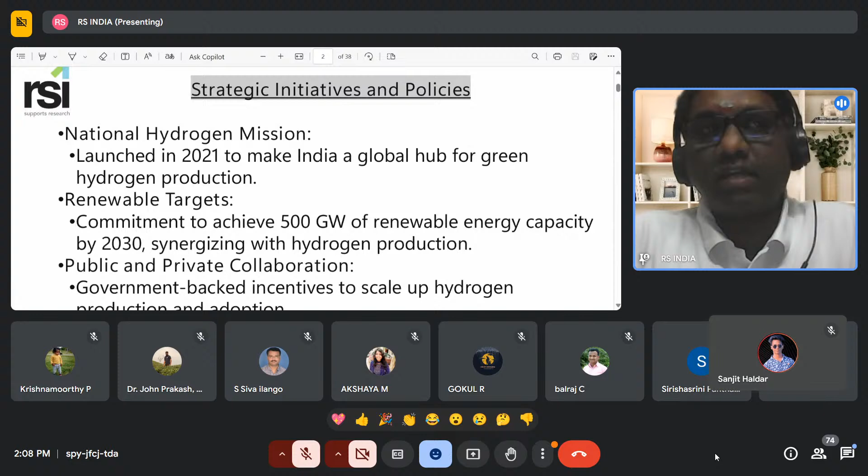But in the recent past, 4-5 years, there has been a lot of interest shown by many private companies, even the government, getting into this hydrogen energy part. Why? The reason is the National Hydrogen Mission, which was launched by the Government of India in 2021 to make India a global hub for green hydrogen production, because India has better chances than any other country for green hydrogen production.

That's the reason hydrogen energy has become a more hot topic in India. Now it is overtaking other technologies like lithium ion battery research, sodium ion battery research, and other battery storage research, which were regarded as the most highly interesting topics for researchers. Now people are getting more attracted towards hydrogen energy mainly because the government is paying more interest in this hydrogen energy.

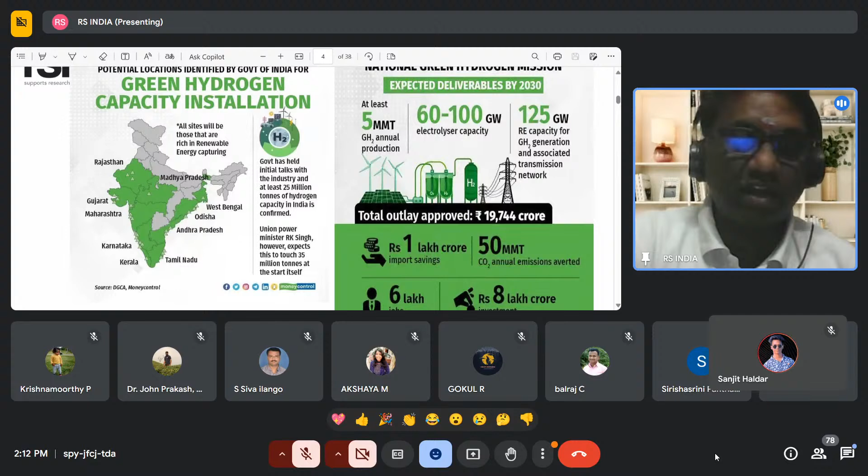They have more, and even Odisha also has been identified as a prominent place for exporting green hydrogen to other countries. So if you look at this, this is the roadmap for India - the government has given some roadmap for how to produce green hydrogen.

Try to focus on this research area, because it is going to play a major role in the Indian economy, and it is going to play a major role in Indian green hydrogen export.

So the reason why we are covering this is to explain why hydrogen research is more important. That's what we wanted to give - a glimpse of the reason why we need to pay more attention on green hydrogen research before getting more into the technical part of green hydrogen production and fuel cells.

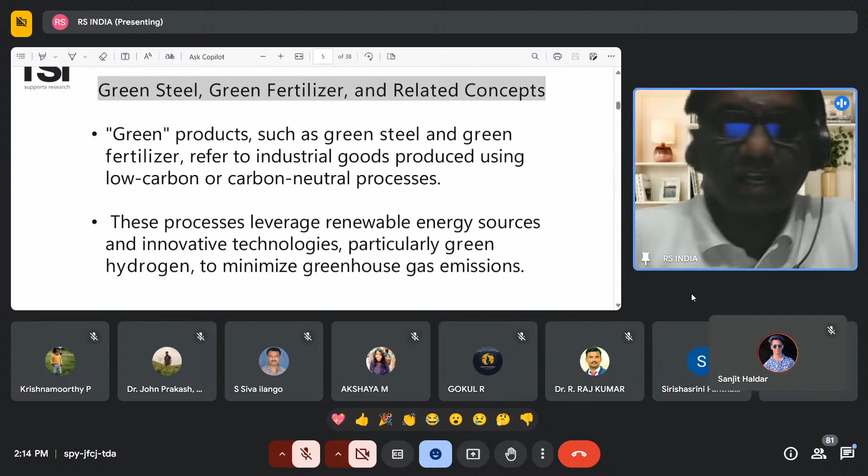As we discussed earlier, the government is paying more attention on green hydrogen production. While they are exporting, who will be the buyer, why should they buy, why should we import, why should we export the green hydrogen?

The main reason is there is now a concept of green steel and green fertilizer. Such green products - green steel and green fertilizers - refer to industrial goods produced using low carbon or carbon neutral processes.

For example, in steel industries, there are a lot of melting processes and various high temperature processes, where the requirement of high temperature is very important, and they are using natural gas or electricity derived from thermal power sources. So they are not green in nature, yet they are being used.

Since they wanted to cut this usage of carbon emission methods, they wanted to utilize hydrogen as an alternative for this. For that they need hydrogen derived from green renewable sources - that is called green hydrogen. So the export of green hydrogen is more important, because the whole world is paying more attention on using hydrogen as fuel in place of other fossil fuels and hydrocarbon based fuels. That's how this green concept is evolving.

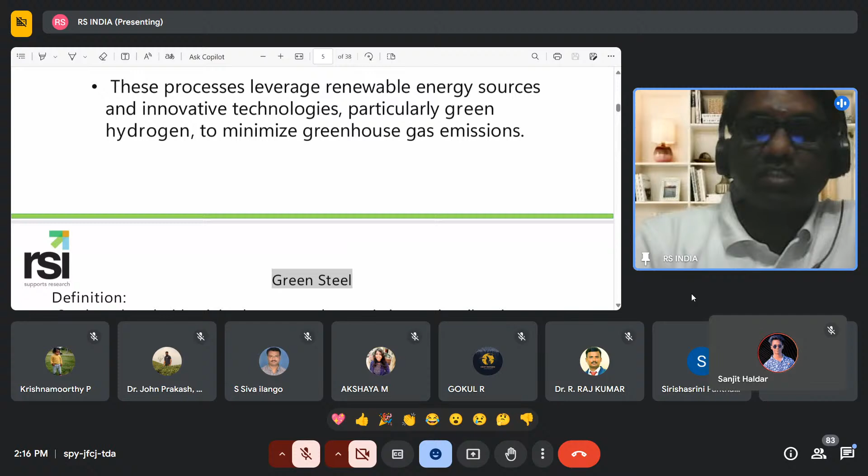This process leverages renewable energy sources and innovative technologies, particularly green hydrogen, to minimize greenhouse gas emissions. That is the main motto, and the European countries are paying more attention to this. So there is a great amount of opportunity for India to export green hydrogen in the near future.

Already there are many private companies like L&T, Sterling Power, Reliance, Adani, and even HPCL, IOCL, all very focused on this research, setting up their own R&D labs and production labs for green hydrogen export. The reason is we are already involved in supplying many instrumentation, software, and production technologies to these companies.

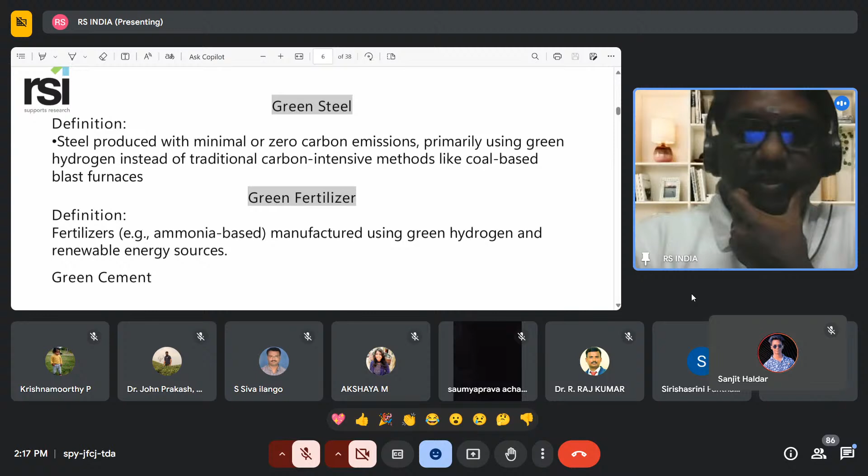So what is green steel? As we discussed, green steel means steel produced with minimal or zero carbon emissions, primarily using green hydrogen instead of traditional carbon-intensive methods like coal-based blast furnaces. Blast furnaces use coal-based fuel, sometimes natural gas, or electricity derived from thermal power plants. So they wanted to cut down the use of such power to avoid greenhouse emissions.

Green fertilizer is almost the same as green steel, manufactured using green hydrogen and renewable energy sources. Similarly, green cement, green chemicals - many applications are evolving. So there is a lot of opportunity available for green hydrogen utilization. India is paying more attention to this, and a lot of opportunities are being created for hydrogen production research.

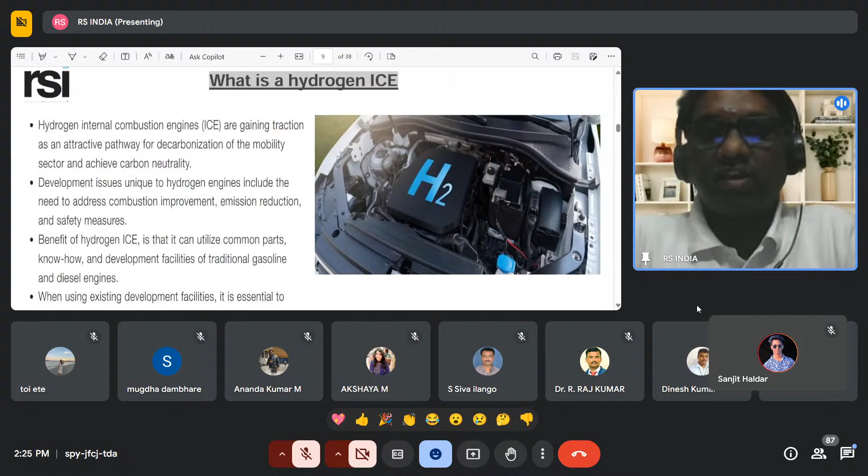So what is a hydrogen IC engine? Hydrogen internal combustion engines are gaining traction as an attractive pathway for decarbonization of the mobility sector and to achieve carbon neutrality. When we burn diesel or petrol, we get carbon monoxide and many other greenhouse gases; it's not good for our environment. Hydrogen internal combustion engines are really good, and comparatively produce very little greenhouse gas when you use hydrogen as a fuel.

The main benefit of the hydrogen IC engine is that it will utilize common parts. We already have the know-how of the IC engine, so the same way we can use hydrogen fuel in the normal IC engine itself. There are no complications, and they are planning that in the existing engine also we can use this hydrogen. That's the research going on.

We had an opportunity to discuss with Ashok Leyland people. We are located in Hosur, just next to Ashok Leyland. They are also very confident that in the next 3 years we can see hydrogen automobiles in the automobile sector. There are real chances, because currently hydrogen storage, the high pressure storage, is the main bottleneck, so they are working on how to get rid of it.

Once that is done, there is a real possibility to see these IC engines in India itself. Currently it is available abroad, where research grade vehicles are being utilized. In India it may take some time, but it is not too far. Soon we will be able to see IC engines using hydrogen fuel on Indian roads. The next slide shows the reality. And the Ashok Leyland person said it is going to come in the next 2-3 years.

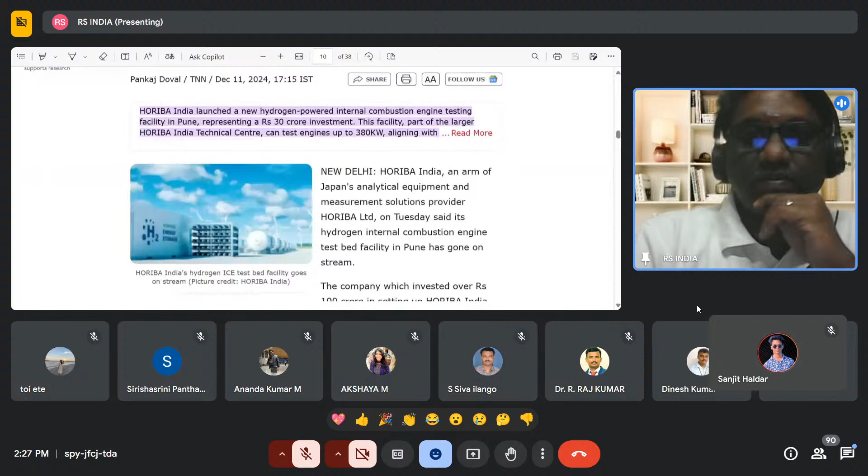This news I saw in the newspaper on December 11th, just 3 days back: HORIBA India's hydrogen IC engine test bed facility goes on stream. They have set up this new facility in Pune for testing IC engines using hydrogen fuel. This is a very interesting topic. So far we have seen diesel, petrol, gasoline, hydrocarbon-based fuels; we may see hydrogen fuel as an alternative.

So soon we'll be able to see. That's what the news gives as information. When you are connecting the dots, actually the reality is not too far. So we'll be able to see this IC engine application also using hydrogen fuel. So that's how this hydrogen fuel is gaining

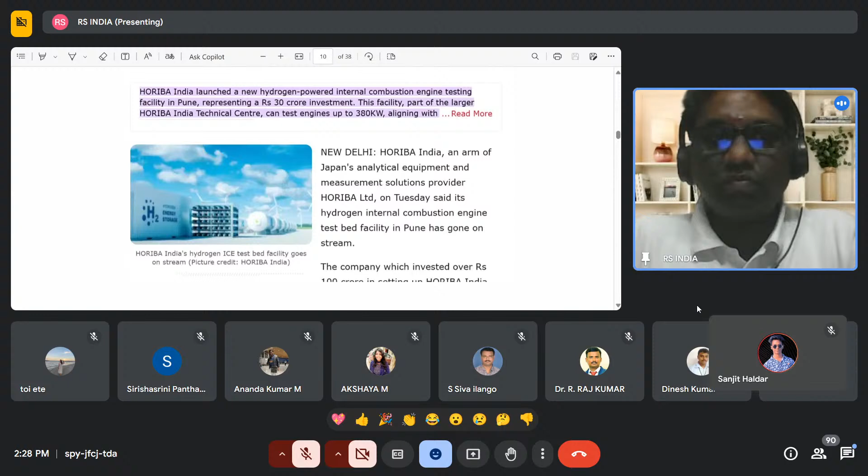So we have seen why we need to pay more attention to hydrogen production research. Now let us move into the more technical part: how we can generate hydrogen, what are the different methods, what components are required, what are the components of that instrumentation, and how it can be tested. We will see all those things in the next slides.

So as we have seen, hydrogen is a key component of most renewable energy sources. Now, there are many different methods available to produce hydrogen, but since I have limited space, I have mainly categorized them here: biomass, fermentation, methane type hydrogen production. And then photoelectrolysis is another method.

These two methods are more on the R&D side, not for high amounts of production. They are not very popular and not suitable for very high hydrogen production. But the other method, the electrolysis method, is the key area being used for green hydrogen production.

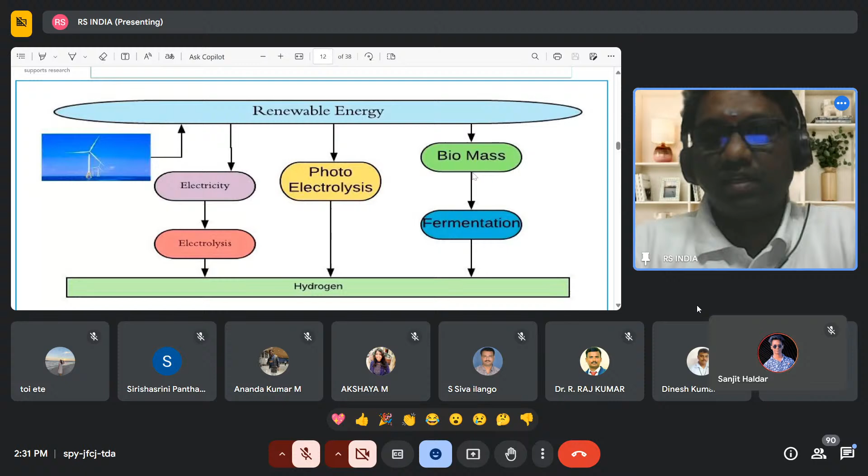In addition to the automobile application, this is one of the very interesting applications. The Indian Army is already using this fuel cell technology in remote locations on our border, in Kashmir, and other remote locations. So hydrogen has many applications, and the fuel cell is one of the main applications.

To produce green hydrogen, as mentioned, there is the photolysis process. This is still mostly in R&D, not developed as a commercial product. People are still doing research. The photolytic process involves the use of light to break water into hydrogen and oxygen, and you can divide it into two modes: photobiological water splitting and photoelectrochemical water splitting.

Photobiological water splitting involves the use of sunlight and specialized microorganisms such as green algae to split water to produce hydrogen. It's an interesting topic and many people are working on it, but honestly speaking, so far no commercial product is available. But you can't ignore it, because it is a very interesting topic.

It's getting more attention from many researchers. Maybe in future, if a commercially viable ROI, return on investment, is achieved using this method, then we can say. But as of now, no commercial products are available. On the R&D scale, many people are doing research on photobiological water splitting.

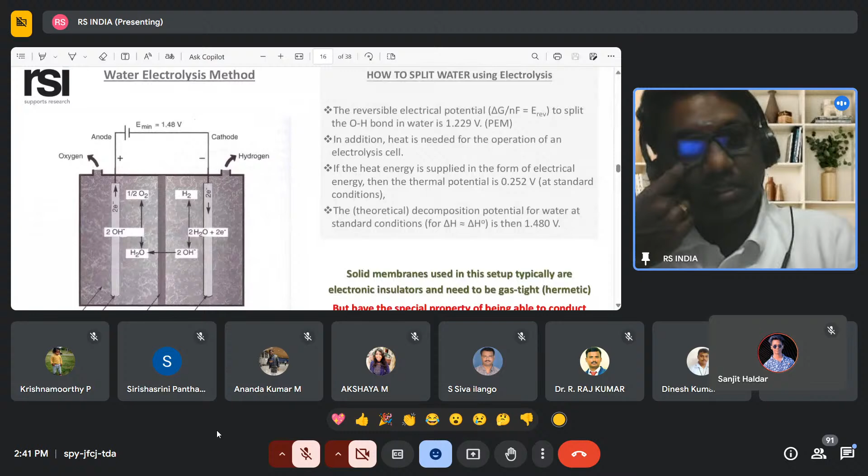If you look at the technologies, there are alkaline based technologies, PEM based technologies, SOEC technologies, AEM technologies, photocatalytic. There are various technologies. PEM is similar to what we use in a PEM fuel cell; this is a proton exchange membrane based electrolyzer. Normally we use commercially available Nafion membranes for this.

So this is the water electrolysis schematic diagram, where we have anode and cathode, two separate tanks. It is polarized with a specific voltage between the anode and cathode, and that's how the water is separated. We collect the hydrogen on the cathode side and oxygen on the anode side. This is a basic simple schematic of how we can produce hydrogen using electrolysis. If the electricity comes from a renewable resource, it is called green hydrogen. Otherwise, it is not green hydrogen.

Here we are applying DC power to split the water to generate hydrogen. In addition to the power, heat is needed for the operation of an electrolysis cell. Normally maybe 40, 50, 60 degrees; depending on the heat, the voltage varies, and the efficiency of hydrogen production also varies. This is one of the basic electrolysis methods. All the electrolyzers, AEM, alkaline, or PEM, work on almost the same principle, but they use different materials, which we will discuss in detail in the coming slides.

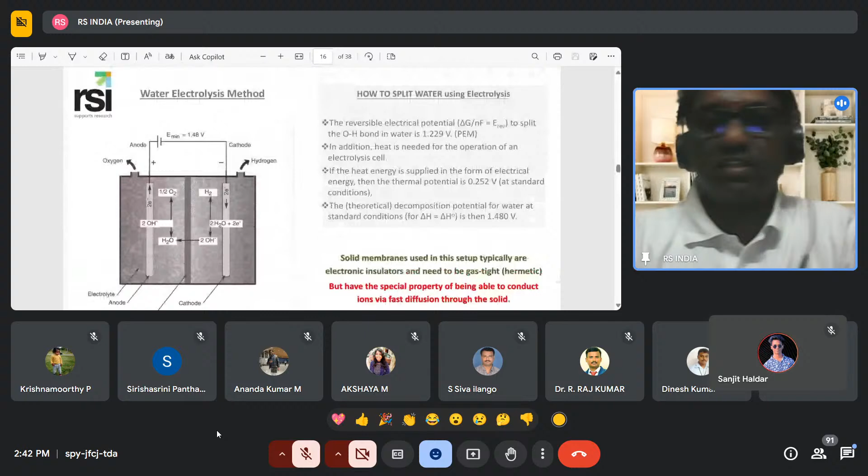One more bottleneck is that we have to use distilled water in this case. In the PEM method, distilled water has to be used as the feed for hydrogen separation. If you have normal water, that will not work, and you need to convert it into distilled water where the conductivity is in the order of microsiemens. Only then does it work well.

Whereas the alkaline or AEM methods use alkaline electrolytes like potassium hydroxide or sodium hydroxide, at many different concentrations. For alkaline, they can use 5 molar potassium hydroxide. For AEM, they can use 1 molar potassium hydroxide. Nickel is used as the catalyst, and the membrane is also not so expensive compared to PEM technology. That's how the alkaline and AEM technologies cost less compared to PEM.

Compared to PEM, SOEC is also a little higher in cost compared to alkaline and AEM, and they are very specialized applications only. We cannot use them in normal conditions; they require very high operating temperatures. Mainly oil and gas companies are paying more attention to this. So we have seen that electrolysis is the best method for generating hydrogen, and out of the electrolyzer methods, alkaline, AEM, PEM, and SOEC are more important.

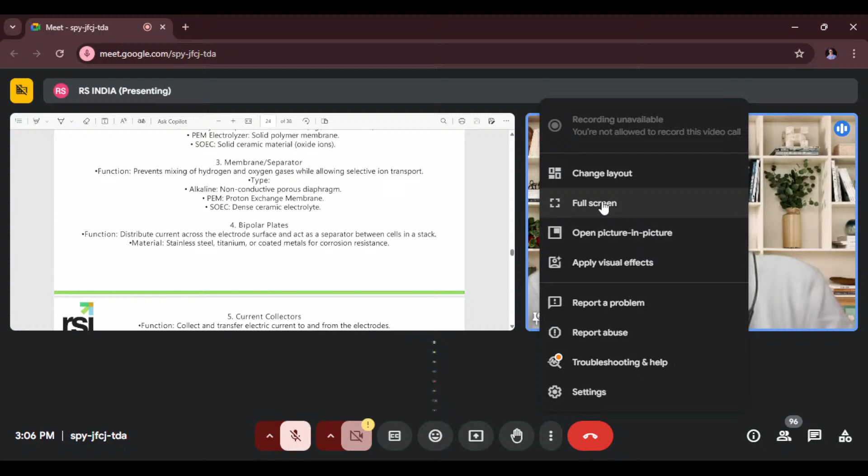Then the membrane and separators, what kind of membrane we use. Alkaline, we use non-conductive porous diaphragm. PEM, we use proton exchange membrane. SOEC, we use some ceramic electrolyte, dense ceramic electrolyte. So that's how actually it operates.

The technology is same, the method is same, the model is same, but depending on the type we use, we change the materials for this. And then the bipolar plates - we use different types of bipolar plates, like stainless steel, titanium, or coated metals for corrosion resistance.

Hello? John, please block that, some noises coming, John. John, please block that. Okay.

So we have seen these bipolar plates, various types of bipolar plates - stainless steel, titanium, or coated material for corrosion resistance we are using. And the

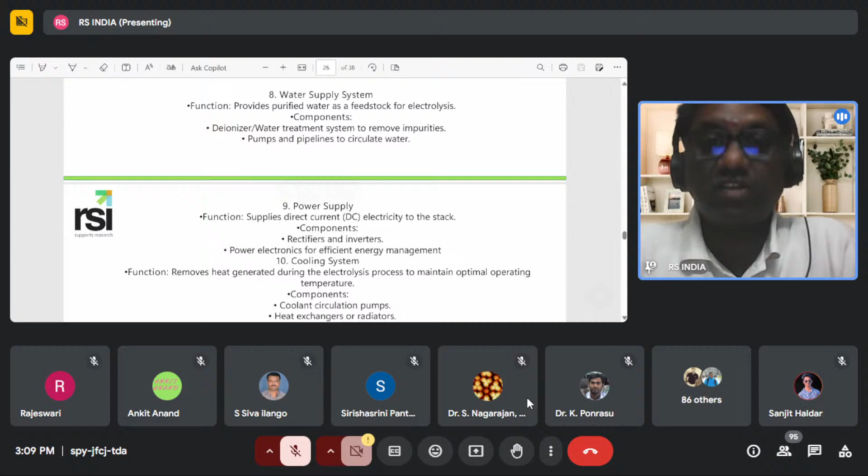Water supply system - it is how you provide the supply of water. Suppose if you supply distilled water to your cell continuously, that may not be an issue. But if you are supplying alkaline solutions like 5 molar alkaline solutions, that itself is really challenging because your materials will go bad and then you have corrosion. You have a disconnection - after maybe 6 months of usage, your pipe will get damaged. So all those things have to be taken care of.

So this has got a very attractive research area for mechanical engineering, instrumentation people. There is a lot of research scope available for the water supply system. This is one of the important portions in the electrolyzer - how do we supply the water? And then the power supply.

Of course, we need electricity to split the water. So for that purpose, DC power supply is required. In normal smaller cases, at lab scale, we can use the programmable power supply. Whereas in industrial grade, like the L&T and all, they are doing maybe around 100 kilowatt, 1 megawatt water splitting. So for that, they cannot use this normal DC power supply.

They have to generate the DC. Usually there are a lot of electrical engineers - importance comes into picture. How to convert the AC into DC and then regulate it into DC, supplying the DC all the time, like controlled DC application. All those things come into picture: rectifiers, inverters, power electronics. So there is a lot of scope for electrical engineering also in this power supply system.

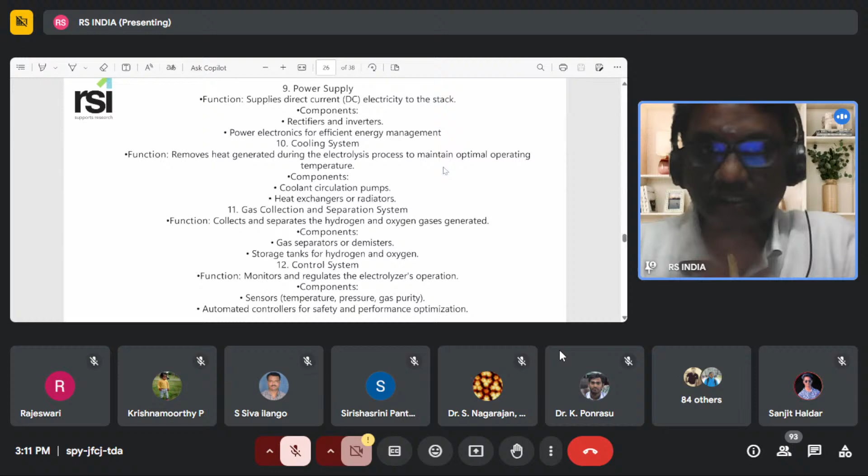Similarly, there is a cooling system because it is generating a lot of heat, and then the heated electrolyte is pumped into the cell for reaction. Once the reaction completes and that comes out, we need to take out the heat, and then we need to pump it back. There will be some recirculation process taking place. For that, we require coolant circulation pumps, heat exchangers or radiators - many different components are required. So here is the scope for a kind of automobile engineer or a chemical engineer. All those engineers will come into picture.

Similarly, once the hydrogen is generated, we need to remove the gas collection and separation system. As we have seen in the electrolysis method, we are pumping the electrolyte and splitting the water into hydrogen and oxygen. Once the hydrogen is generated, it carries a lot of moisture and water droplets, which has to be removed using various gas separators or demisters or other methods.

So this is another research area where we can pay more attention: the control electronics. All these things require control electronics, software, and power electronics. All these things are required.

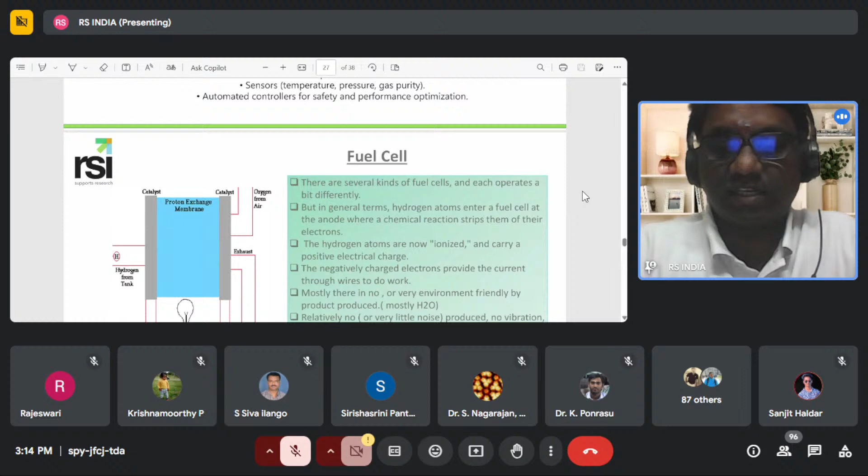Next we'll get into fuel cells. Fuel cell, as we know, is used to convert hydrogen into electricity. Similar to the electrolyzer, the fuel cell has got various types: PEM fuel cell, SOFC fuel cell, DMFC fuel cell. SOFC means solid oxide fuel cell, PEM means proton exchange membrane fuel cell. There are various different methods available.

So the more widely accepted and used method for fuel cells.

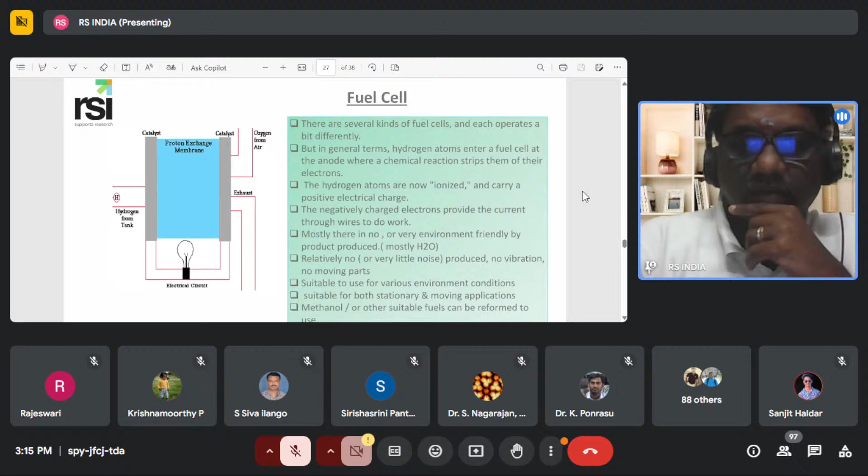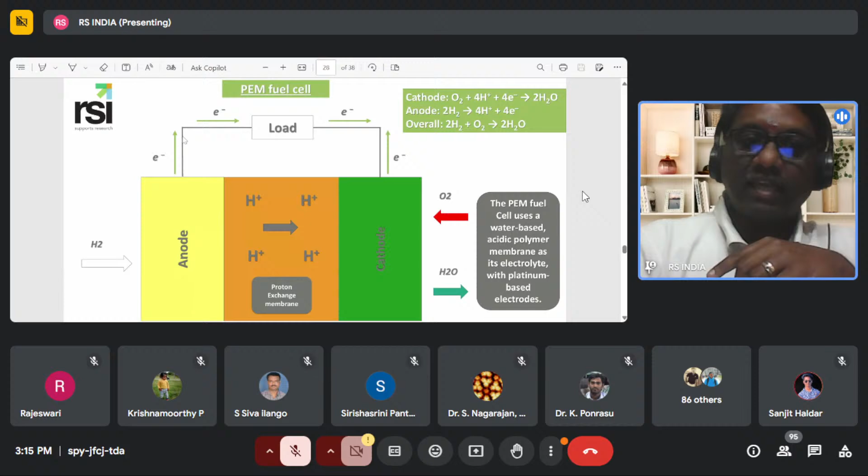I hope you must have seen these slides already in the previous presentations. When the hydrogen gas is supplied at the anode, the electron and proton are separated. The electron will take this route via the load, and only the proton travels via the proton exchange membrane to the cathode side. Again at the cathode side, the electron and proton get connected, and we get water as output. The electron is bypassed and not allowed to travel via this membrane, so it takes another route - this is where we are capturing the electron as electricity. So this is the basic fundamentals, which you must already know.

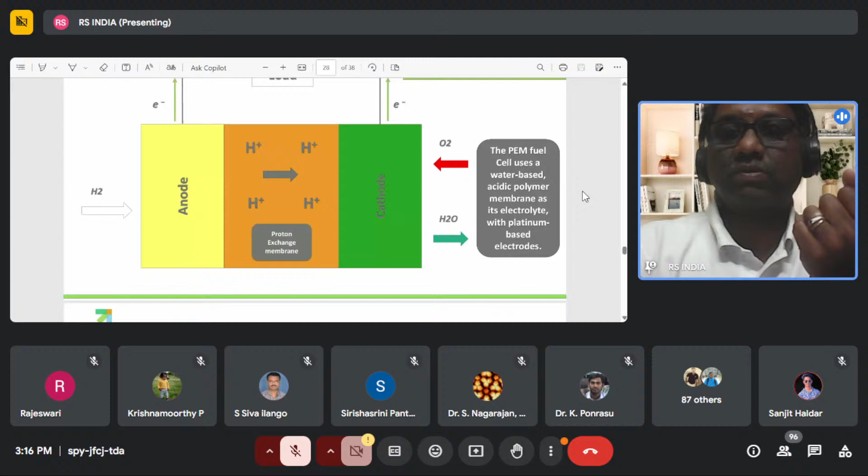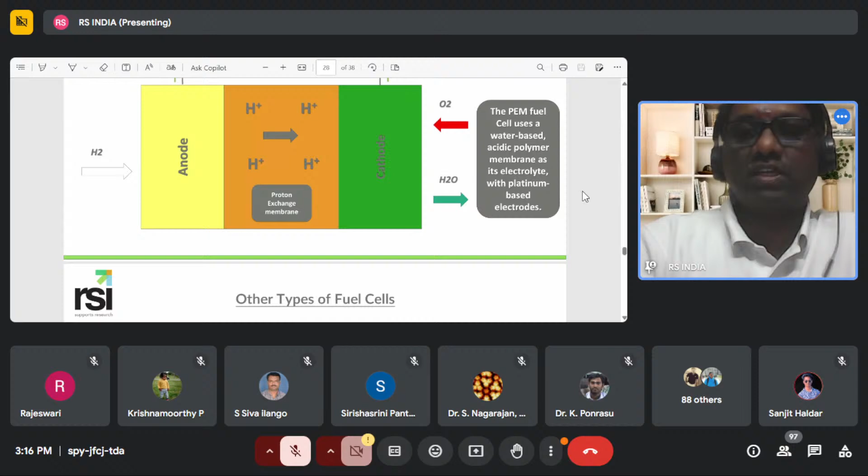This PEM fuel cell uses a water-based acidic polymer membrane as its electrolyte with platinum-based electrodes. Similarly, the PEM electrolyzer also uses platinum-based electrodes and catalyst. That is the reason this PEM method is a little expensive compared to other methods. But this is the one prominent and proven method as far as fuel cells are concerned. Of course, there are other methods like phosphoric acid fuel cell, DMFC - there are various methods, but this is the more proven and viable solution in fuel cell technology.

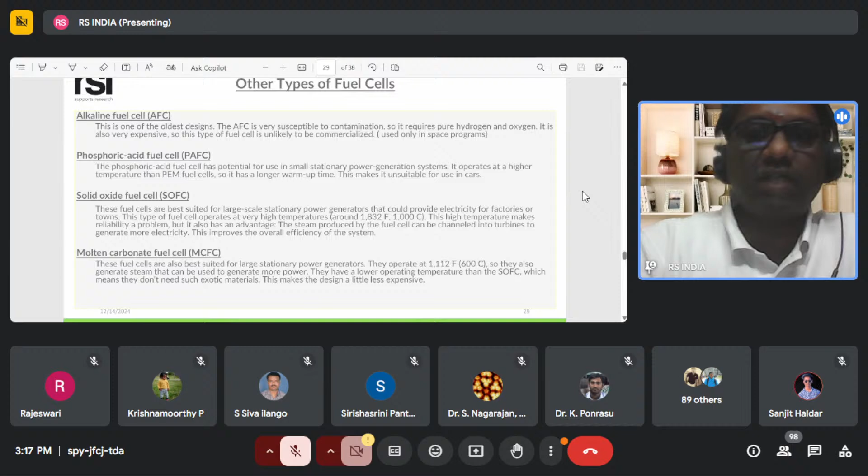Other fuels include alkaline fuel cell, phosphoric acid fuel cell, solid oxide fuel cell. Solid oxide fuel cell is one important technology used mainly, but as we have seen, it requires very high operating temperature, around 650 to 850 degrees, which limits its applications - only very few areas use it. Other technologies are not very popular, not commercially viable. They've tried to use them, but they were not as popular as PEM technology, which is why mainly people use PEM technology.

If you look at the applications of fuel cells, they are used for portable applications, stationary applications, and transport/automobile applications - various different applications. Portable applications can be used in remote areas like a UPS, or as I mentioned, in the army - Indian army and many other countries use this fuel cell to power remote locations where they cannot provide direct power using cables. This is the easiest way to generate power. So when you want to use portable ones like PEM fuel cell, DMFC (direct methanol fuel cell), SOFC - they are really good.

When you want to use stationary fuel cells, for example to power a room or building, where you need power in terms of kilowatts to megawatts, PEM technology is the more prominent one.

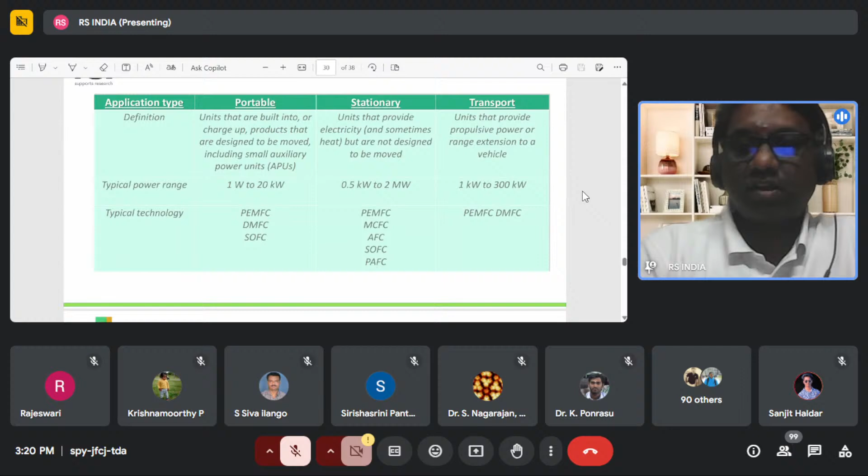PEM is more prominent and proven. Currently we can see that in future this PEM fuel cell will come into picture for automobile applications. But sooner, hydrogen IC engines are also on the cards. We don't know what will happen in future, but fuel cell is currently very promising technology because there is no combustion, and the only output is water, so absolutely zero emission. The fuel cell holds a very prominent place, especially for automobile applications compared to IC engines.

If you look at this technology, how do you rate its strength, weakness, opportunities, and threats?

If you look at the strength of the PEM fuel cell, it converts hydrogen directly into electricity, produced at site. It's very easy - you just supply the hydrogen and automatically get electricity. Very simple, no burning, nothing required. Just supply the gas and take the electricity outlet. It's an inexhaustible source, not like a fossil fuel or depleting resource - it's always available in abundance, like water, so it can be easily made and recycled.

Sustainable development, strength, and diversity in resources - these are all great strengths of these fuel cells.

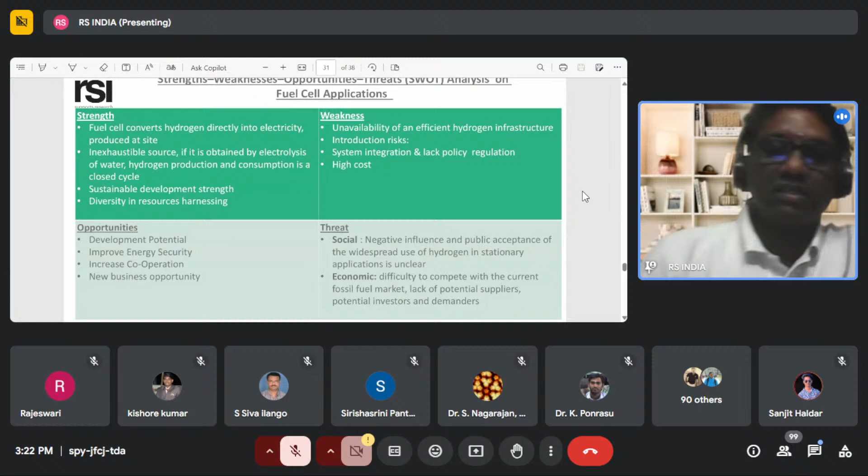If you see the opportunities, it has development potential and improves energy security because it's not depleting, and carbon emission is nothing. It's more futuristic, and over time, as hydrocarbon fuel becomes more expensive, this will become cheaper in comparison during the course of operation. Maybe after 20 or 30 years, this may play a major role compared to fossil fuels.

As for threats - negative influence is why, even though it's already available, it's still not popular among the public. Many people don't know how to use hydrogen, and there's lack of awareness and safety issues. Even during installations, many people are afraid of using hydrogen cylinders. It has its own limitations, safety concerns are there, but if all the norms are followed promptly, there is no issue. That negative influence has to be removed.

It's good that our central minister himself is using a Toyota hydrogen car. That's an added advantage - it will improve confidence among the public in using hydrogen vehicles and other applications.

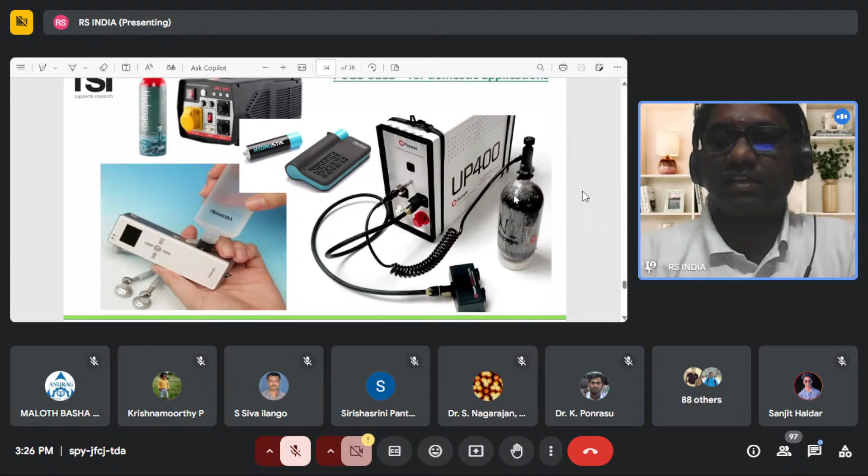Like a petrol generator, this will similarly use hydrogen as a fuel. Hand-carry generators are already used in many applications, especially remote applications where they do not have access to normal electricity, where wired power connections are not available. They are using it. So the applications of the fuel cell are not limited. They have many applications, not only automobile: domestic applications, stationary applications, portable applications. A variety of applications are available.

There is an interesting comparison I have seen between the hydrogen fuel cell and the lithium-ion battery: why it is not so popular, and how it is going to become in future. People will pay more attention to hydrogen fuel vehicles, because currently lithium-ion battery cars are called green cars. There is no combustion, there is no emission, so they are really environmentally good. But hydrogen cars are not popular mainly because of the car price. These car prices I have taken from a US website.

The approximate cost of a hydrogen fuel cell vehicle is €60,000, whereas in India I think it is around 60 or 70 lakhs, more than that. The electric vehicle costs 1/3 of the hydrogen vehicle cost. The running distance is almost the same. In the electric vehicle, the disadvantage is the charging time. But with hydrogen fuel cells, it is maybe 3 or 4 minutes; like how we fill petrol, we can fill hydrogen. So this is one great advantage: there is no time loss, whereas an electric vehicle needs a lot of time.

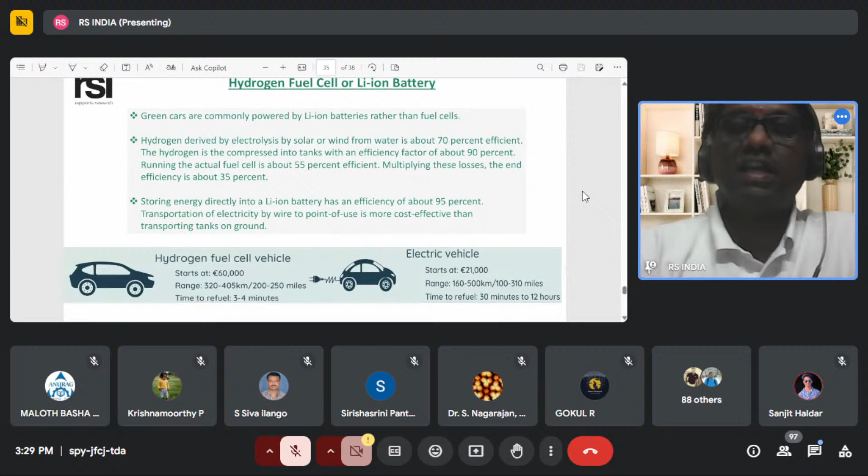And when mass production begins for hydrogen fuel cell vehicles, that will give a formidable advantage for reducing the fuel cell vehicle cost. So over the period we can expect hydrogen fuel cell vehicles to compete with electric vehicles, maybe in 5 to 10 years. Not in India, but at least in other countries, the US or European countries.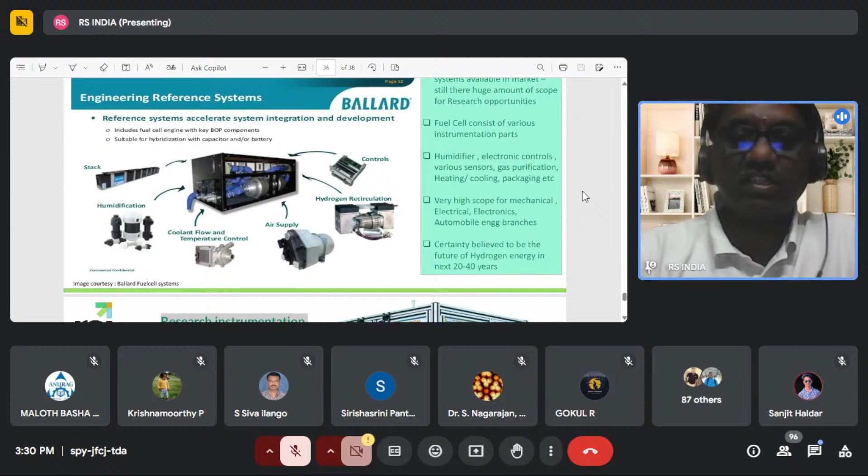And then, as we have already seen, the electrolyzer has a lot of research scope for various domains like electrical, mechanical, instrumentation, chemical. Similarly, the fuel cell also has a lot of instrumentation involved in it, like humidity, coolant, the electronics, power supply for electrical, hydrogen recirculation for the chemical engineers, and then control for instrumentation. So it has a lot of scope for various research domains.

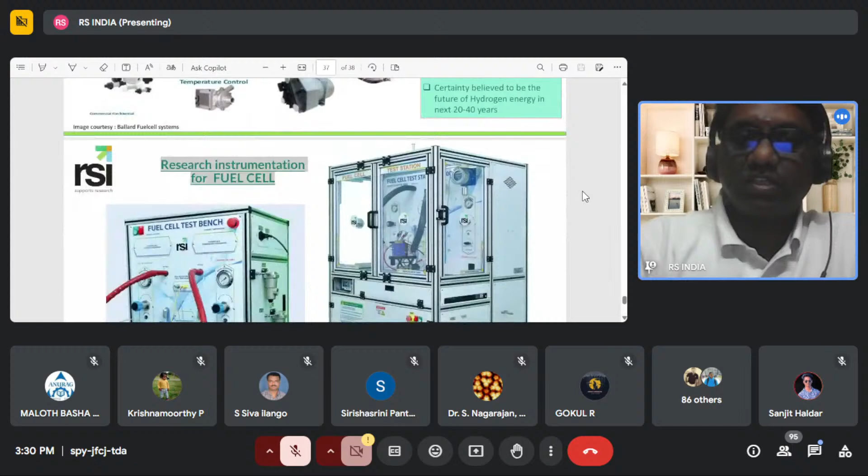So people can confidently get into this field. Because this field is only now getting more popular, they might get a good opportunity in future. To test these fuel cells or electrolyzers, we need some test stations.

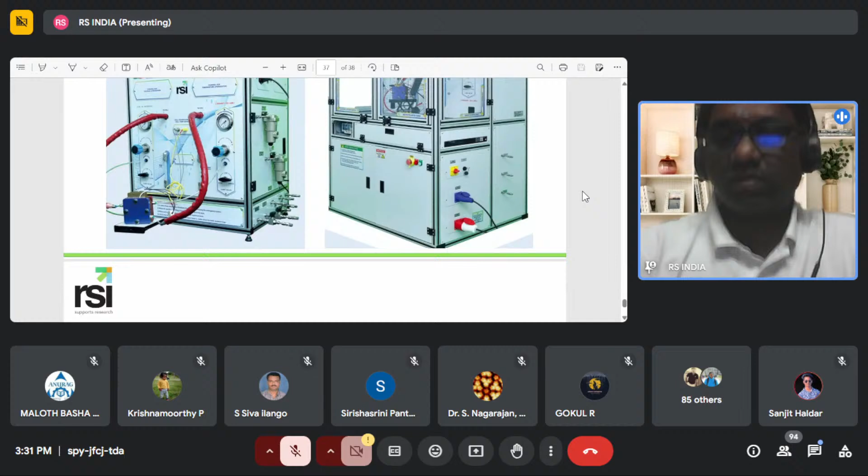So I think we are already running out of time. So let me go through this. Okay, yeah, we have reached the end of this presentation. I thought of giving at least 10-15 minutes for a more interactive session, but already we are late.

I would be happy to answer if you have any questions regarding these applications like electrolyzer, hydrogen generation, and hydrogen applications. If you have any questions, please try to post them. Yes, sir, please go ahead.

Sir, good presentation. What about the storage of hydrogen? So the storage of hydrogen currently, as I mentioned, there are normal cylinders, like oxygen cylinders, hydrogen cylinders, metal cylinders available in the commercial market. They cannot be used for high pressure applications. They can be used only up to a maximum of 16 bar or lesser pressure.

But when you want to use it for automobile applications, you need minimum 32 bar, 64 bar, and then it goes up to 320 bar. For real automobile applications they go from 160 to 320 bar pressure. For that, special cylinders are used: type 3 and type 4. Especially for automobile applications, they use type 4 cylinders. The material they are using

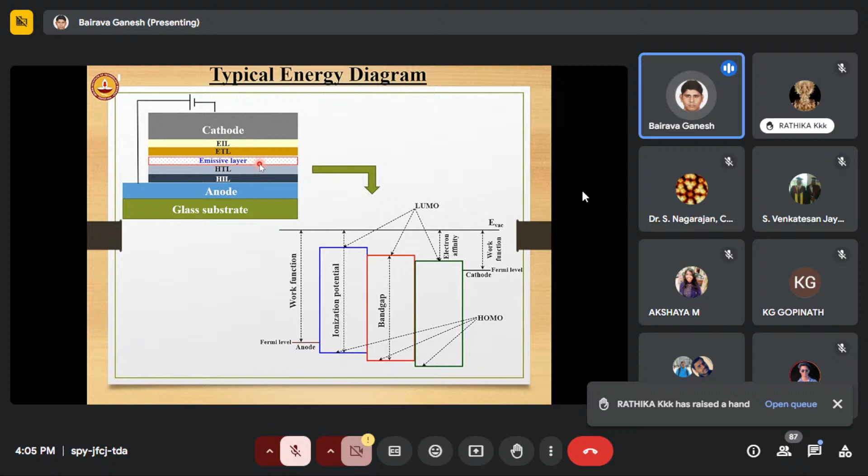So here I have mapped this organic device with their work functions. You can see the anode, and this is the cathode side. This is the E vac and this is the Fermi level. You can see typically the work functions and how the HOMOs are arranged against the LUMOs, and every time the holes and electrons will move towards your emissive layer and recombine at the emissive layer and produce excitons.

What are the materials typically present in the OLED structure? For the anode, as I mentioned, 95% of people are using ITO, indium tin oxide, because of the work function and ease of use. A few studies have been done using silver nanowires in place of ITO. For the hole injection layer, traditionally people use molybdenum oxide, or HAT-CN, a famous organic molecule, or PEDOT:PSS, where you can do solution processing. For the HTL, people typically use TPD, NPB kind of amine derivatives.

The active layer has been classified into three types: fluorescent based emitters, phosphorescent based emitters, and thermally activated delayed fluorescence based emitters. This is again a species of fluorescence, but the mechanism is a bit different, which I will cover in the coming slides. In the electron transport layer, people use BPhen, TPBi, TAZ; for the EIL, as I mentioned, lithium quinolate or lithium carbonate or lithium fluoride. People use aluminum on the cathode, or magnesium silver, silver or silver aluminum. So these are the typical materials used in the OLED layers.

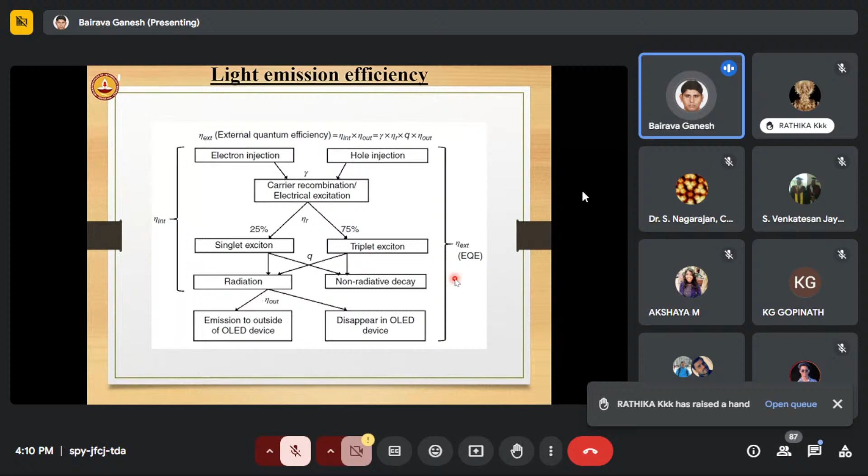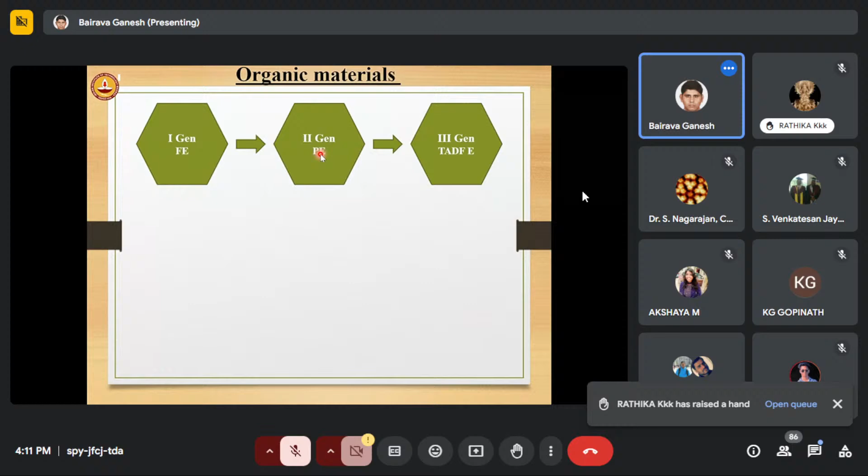Let's see the organic materials and devices. Like I mentioned, the first generation is called fluorescence-based emitters. Second generation is called phosphorescence-based emitters, and third generation is called thermally activated delayed fluorescence-based emitters. In terms of cost, fluorescence are small molecules having very low cost. Phosphorescence involves rare metals like platinum, iridium, and so on, so it is high cost. And TADF involves no heavy metal, so it is low cost.

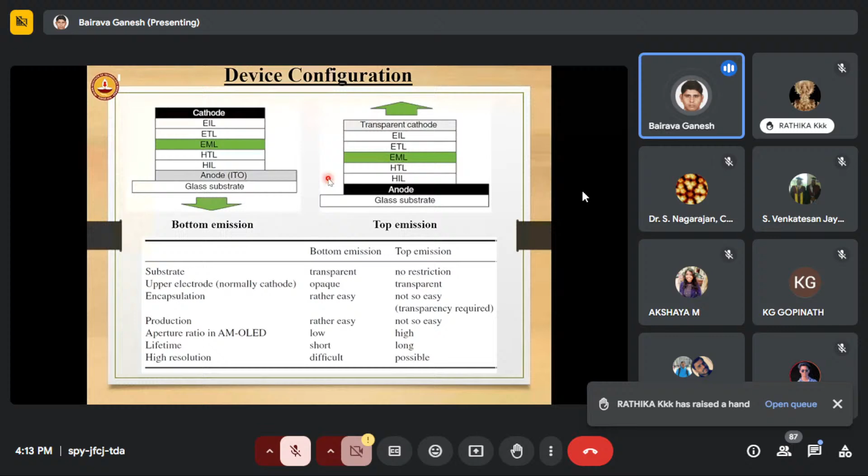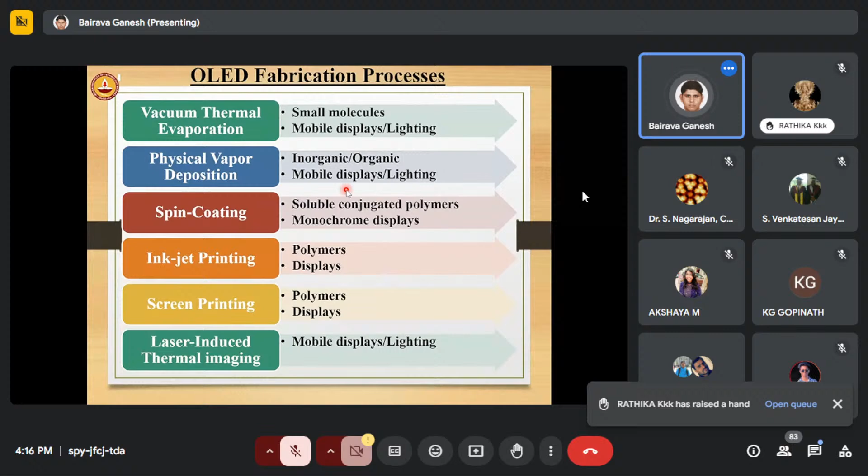How is the OLED fabrication process happening? People are using vacuum thermal evaporation, sputtering, spin coating, inkjet printing, screen printing, and laser induced thermal imaging kinds of processes. So basically, like I mentioned, we typically use vacuum thermal evaporation, where you use a crucible filled with organic molecules, and when we apply the current, the thermal evaporation happens, and the substrate is on the top. Using a shadow mask, wherever you want the pattern, that particular material will be deposited. And the thickness is monitored by a QCM, crystal monitor.

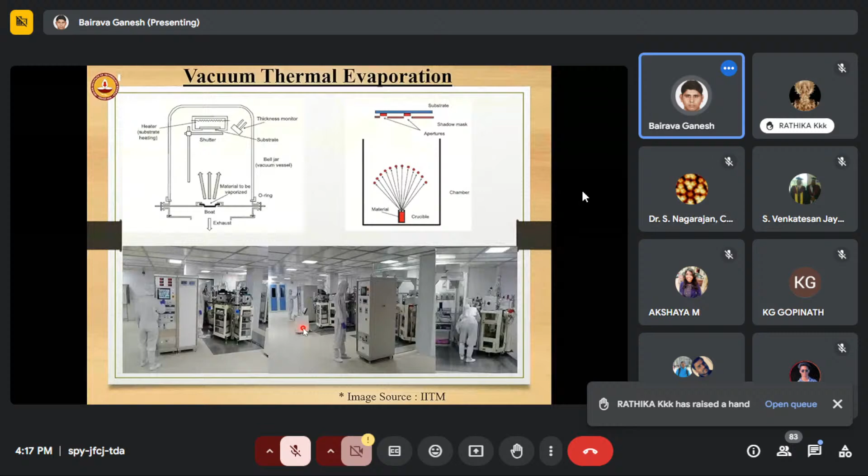So this is the facility which is used in our center. We use full vacuum thermal evaporation. Similarly, you can do a physical vapor deposition called sputtering. Advantages: you will have good dopant control. You have control over your temperature and carrier gas flow. And this is suitable for large area applications, which I have given here. And this is a heat-based method, so growth of dense film is a bit challenging.

Spin coating again is a very simple and cost-effective process, which is used for proof of concept in the lab, and suitable for soluble conjugated polymers. Just dispense the polymer solution, spin, ramp up and dry, and you will get a simple device. And of course, you need to make your contacts.

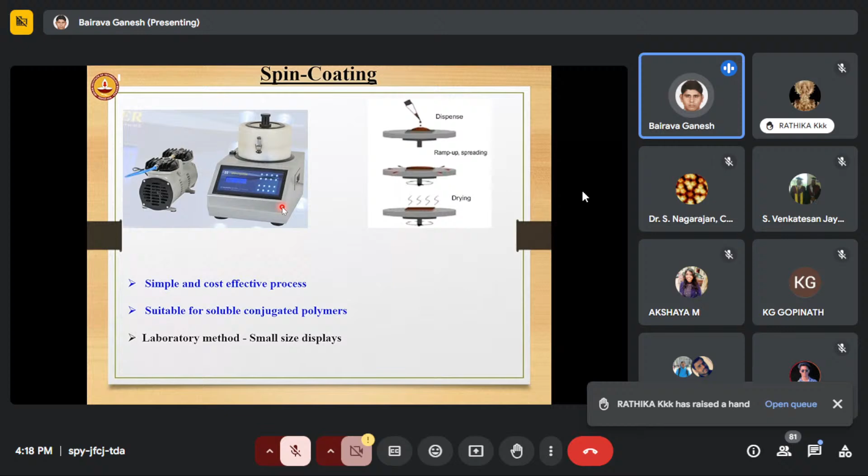Inkjet printing: again, you convert your organics into inks and just drop this ink, and there is no need for a masking process. It is suitable for large area display applications, but the display quality is not that equal. This is used for billboards and other applications. You have very good manufacturing flexibility, but the challenge is that ink rheology is very important, because the rheology will change during drying and evaporation.

So this is a typical process flow of red, green, blue side-by-side AMOLED. Typically the OLED evaporation is one cluster and OLED encapsulation is one cluster. You bake and clean your TFT thin film transistor substrate, do an O2 plasma, deposit the hole injection layer, hole transport layer, and individually you do the emissive red, emissive green, and emissive blue layers. Then you deposit the ETL layer, EIL layer, and cathode, and you put a capping layer to avoid any oxidation.

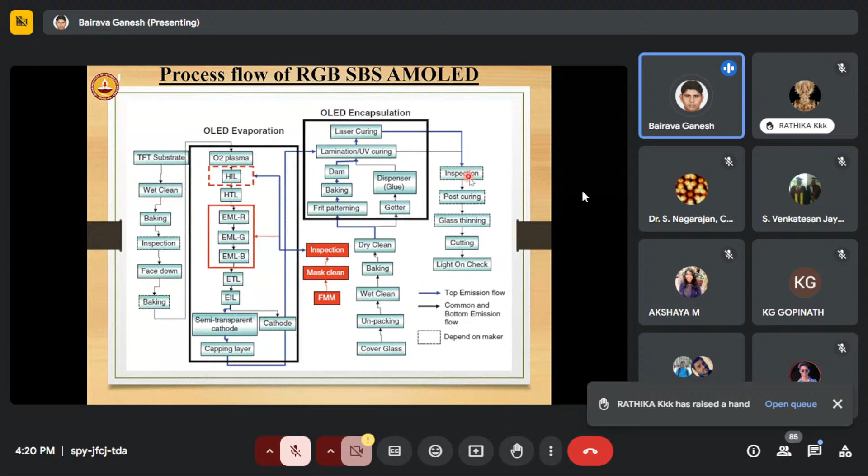Then this will be transferred to the OLED encapsulation, where you do laser-based curing, a laser-based process. After that, you attach a cover glass. Basically, the cover glass is to avoid any kind of oxidation or moisture ingress to the substrate. After that, it will go for inspection, curing, then you cut and check the light. Okay, this is the process flow of side-by-side.

So this is how industry follows a cluster type. The backplane will be introduced, and in one cluster you have HIL 1, 2, 3, and you use plasma in some places for cleaning. The cassette will come from here. You do blue first, followed by red and green. Then you do the cathode and it will go for encapsulation. So your structure will look like this.

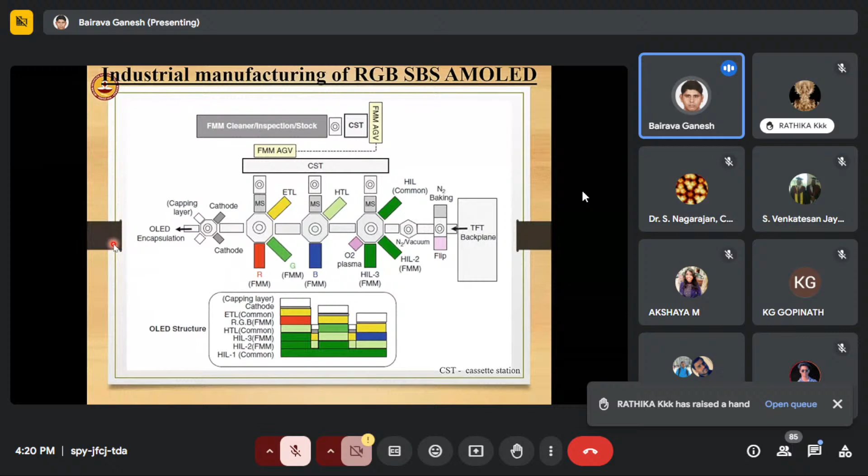How do you do encapsulation? Basically, encapsulation is where you attach a cover glass on top of your device glass. The purpose is to avoid moisture ingress and oxidation, because organic devices are very sensitive to oxidation and moisture. Any moisture ingress and oxidation will kill the device, and you will get dark spots.

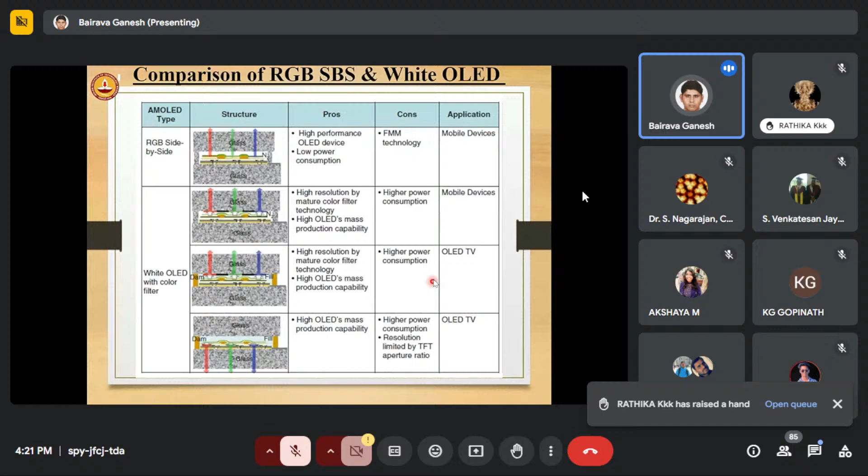This is a typical comparison of red, green, blue side by side. Similarly, you can use white light to produce the other colors. Here you can produce high performance OLED devices, and this technology is a fine metal mask based technology used in mobile devices. This is a top display, and white light is very good for OLED TVs, where light is produced on the bottom.

Let me take another two to three minutes to brief about challenges and opportunities.

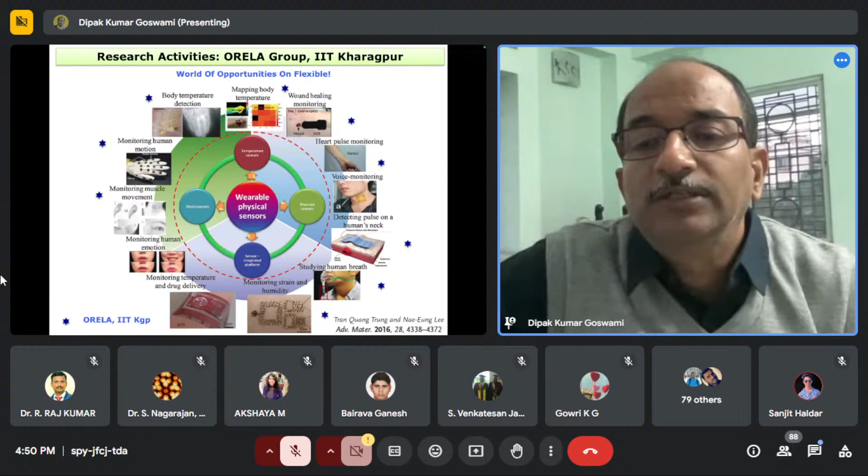So let me continue. What you see is there are lots of healthcare device sensors, categorized into 4 different categories: temperature sensor, pressure sensor, sensor in integrated platforms, and strain sensor. These are 4 verticals, and under these we have multiple sensors like body temperature mapping sensor, wound healing monitoring sensor, heart pulse monitoring system, voice monitoring system, and many more as listed here. All these sensors one has to develop and integrate into a prototype module to make a medical device and connect into the Internet of Medical Things. Then we can have a lot of flexibility in giving healthcare support to people of the country. All these, actually all the sensors, we developed in our lab, and I'll talk about some of them depending on time, and show that there are enormous possibilities, a world of opportunity on flexible electronic devices in healthcare, which one can pursue through this topic in their career.

The first sensor is the temperature sensor, which is ultra fast and ultra precision. Ultra fast means it takes millisecond time to measure temperature, and ultra precision means it can measure up to millikelvin temperature. The material we use is basically barium titanate nanocrystal along with some other polymer. We made a medical device for monitoring body temperature continuously, and also developed a smart mask useful for sleep apnea, and a smart spirometer for detecting and monitoring chronic obstructive pulmonary disease, COPD, asthma, and such conditions.

Second sensor is the humidity sensor. In this we used sensing materials like proteins, gelatin and albumin, and these humidity sensors can also be used for different medical applications.

Next is the strain sensor, which is basically a pressure sensor made with silver nanowires. It's an extremely sensitive sensor that can measure heart rate and blood pulse rate in your artery very comfortably with high precision.

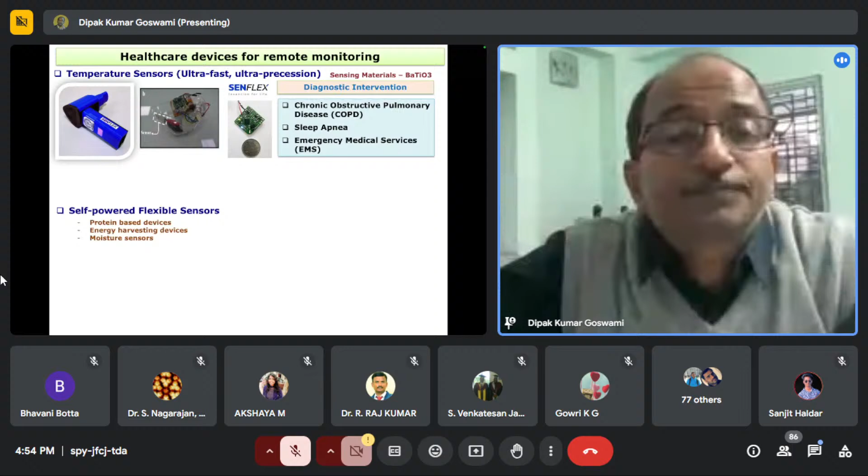This is a self-powered device, and you can see it's actually ultra flexible, developed on a 300 micron paper substrate. As I mentioned, it's a self-powered device that absorbs humidity from ambience and generates power. At the same time, it can also work as a sensor.

The main sensitive material is actually protein. We demonstrated that this is really an ultra flexible sensor, and it can very comfortably measure the moisture concentration in any area where you have a wound. Monitoring moisture concentration in the wound area is very important for doctors to continuously monitor the wound healing mechanism, because if it is completely dry or fully wet, both are actually not good for healing. So there is some percentage of relative humidity that should be maintained, and accordingly the treatment is decided. It's very important for monitoring wound healing moisture concentration in the wound area.

Next sensor, as I already mentioned, during the COVID time we developed a sensor which is an organic field effect transistor based sensor, and we demonstrated that it can detect COVID virus from saliva samples. It doesn't need to collect data from nasopharyngeal samples, because that is sometimes difficult. It can be used for self-test, and it takes only a minute to detect whether your saliva has virus or not. We have an app, and this is the profile of detection. In just a few seconds, it can tell you whether you are COVID positive or negative.

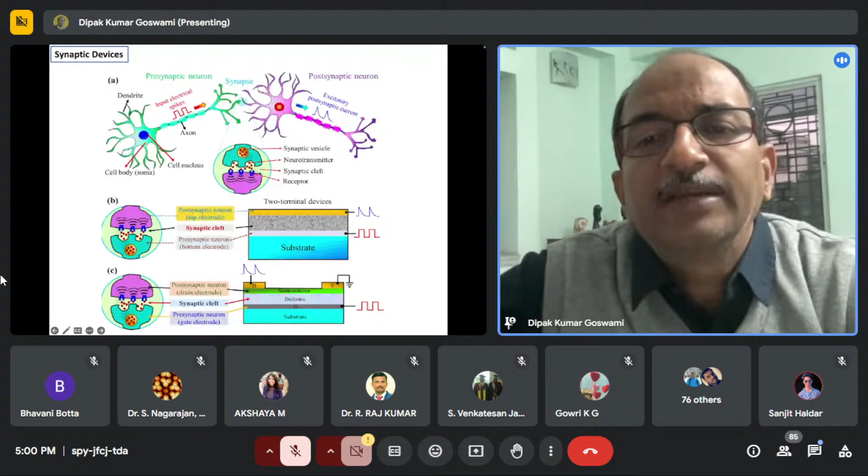So since an ion conducts this signal, you can think that one can have an electronic device where actually the charge transfers. So we in fact develop these devices with different kinds of materials. Mainly these are all biomaterials and biocompatible materials for different applications.

So let me start with the first part. It's basically from fundamentals to technology development. Let's just quickly go through that. You take a material, right? And if we think about the charge transfer through this material, then we essentially consider the electrons, right? And if you take, let's say, silver or gold or silicon, the atomic number tells you how many electrons you have in a single atom.

Now if I have a piece of material, let's say gold or silicon, which is a semiconductor, I have billions of atoms. Let's say I have 10,000 atoms in a small piece of silicon. I have 10,000 times 14 electrons in that material. Now, where are those electrons? Not only look at the atomic structure; the periodic arrangement of the atoms leads to the formation of a band structure.

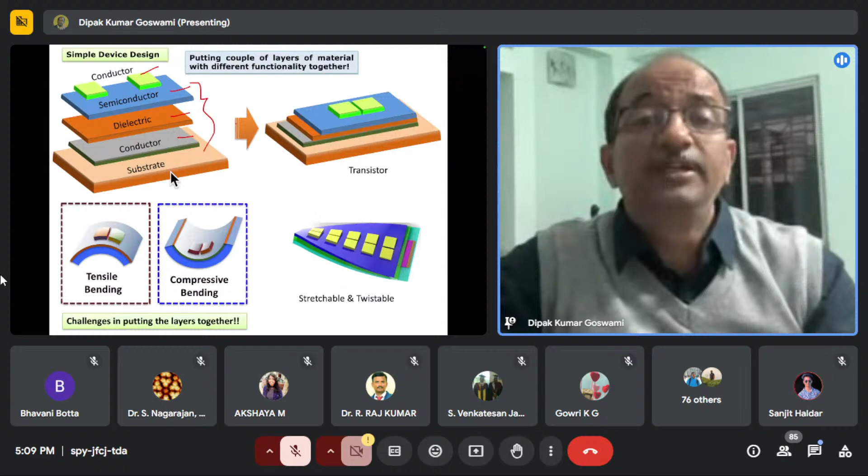And then whether these devices will be flexible or stretchable or not depends on the selection of the material that you have here. All right. So if the materials are not flexible, your device will not be flexible. If your materials are flexible in nature, then the device can be flexible, including the substrate, which also has to be flexible in nature.

All right. So how do you use this device as a sensor? An organic field-effect transistor is an electronic device which can be used as a sensor. How do you do that? There is a very fundamental understanding of making the selection of material for a specific application. For example, in this case, we consider the dipoles, and the dipoles are essentially separation of charge, negative and positive charge, which is P, and can be written as Q into D, right?

And when you apply some electric field to this kind of dipole, then basically there is a force which is applied here, right? And a negative force is applied there, so that force is basically Q into E. So your dipole basically gets a torque, and because of the torque, this dipole gets polarized. And when this dipole gets polarized, this is your electric field direction, it tries to get polarized along this. So you get a component along the PZ direction, and that's the polarization of the electric dipoles.

So if you can polarize them, then the thing that is changing is basically epsilon r. Epsilon r is the dielectric constant. So this is the classic Clausius-Mossotti relation for dielectric constant. If you can make a little bit of change in polarization, the Z component of the polarization vector, then you see that your dielectric constant will change, and this actually goes as the square of that. That means a little change can make a significant change in the dielectric constant.

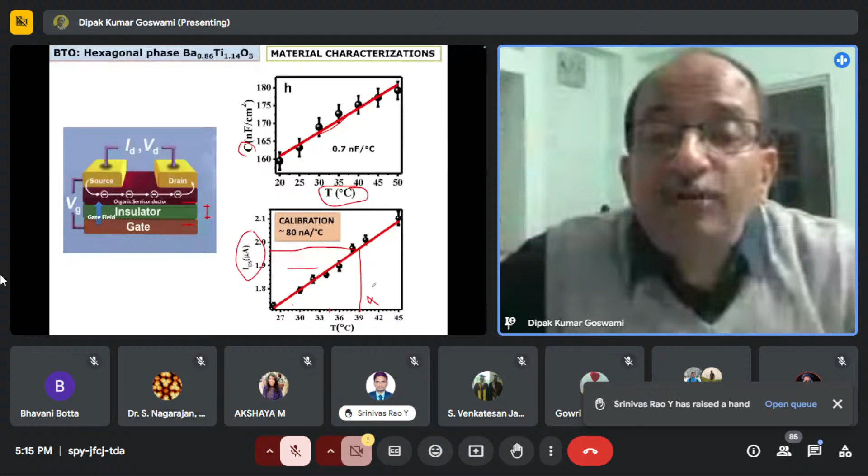And this value, like 80 nanoampere per degree centigrade, is a very high value of current, which can give you resolution in the millikelvin temperature range, and the response time is also pretty fast. So these are all material characterization. I will not spend too much time on it, but once you fabricate this device, look at the carrier mobility of this transistor. This is in days, so we checked over a year's time how the carrier mobility is changing.

And we do see that it does degrade, but at some point, when your carrier mobility is something like 0.2, it's almost flat. So it saturates there. So if you use this transistor as a temperature sensor, it can go for years without changing its property significantly. So that's the stability.

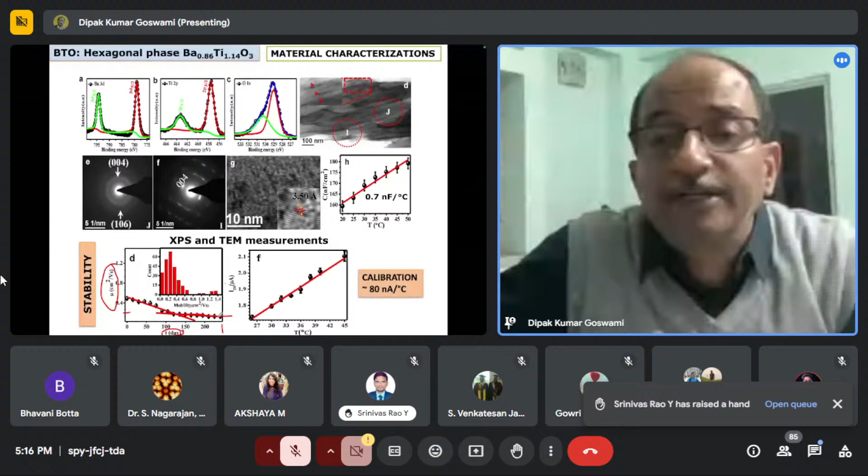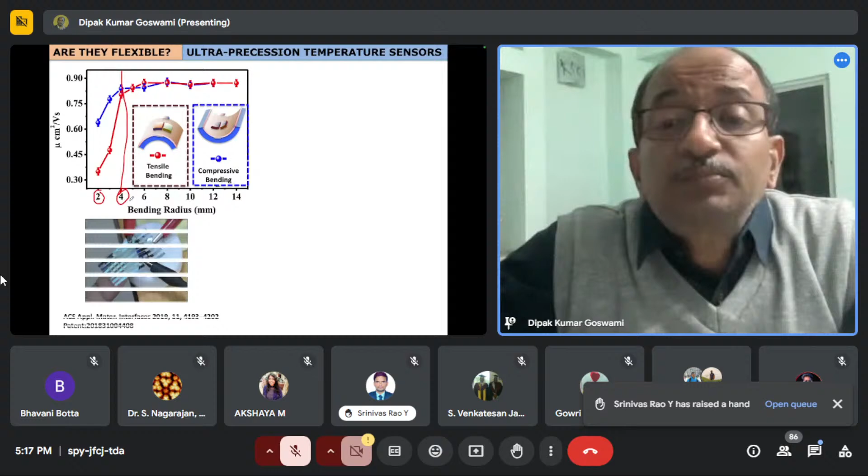All right. So just to confirm, can you hear me clearly, or is there still an issue? No issue, sir. It's perfect, sir. Fine. Okay. Thank you.

Some noise coming. Anu, can you please block that? Okay. Anu, can you please block that? Sir, your mic is mute. Please unmute, sir. Sir, please unmute your mic. No, sir. Please unmute. Is it fine now? Now fine, sir. Yes, sir. Sorry, sir. Sorry. Yeah.

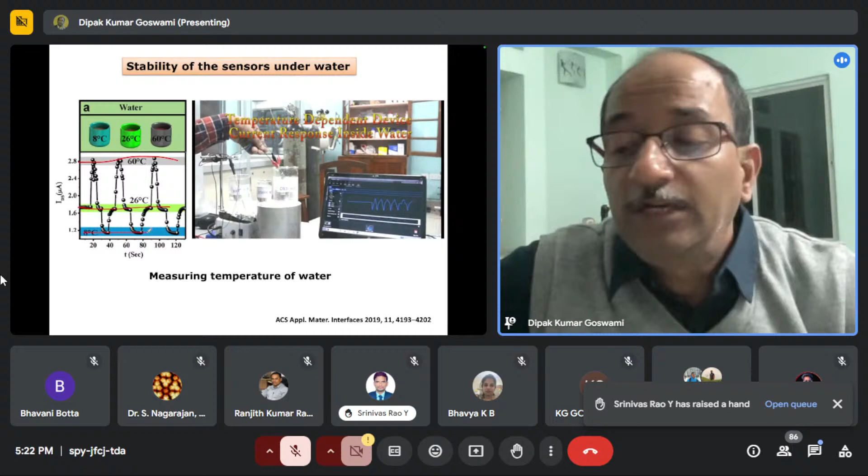And then we tested how stable they are. You see that there are 3 beakers of water, so you can dip into the water, and you get absolutely the same temperature every time you dip. They're highly stable underwater, and not only underwater, we also measured in different pH solutions and different salt conditions, and everywhere we confirmed that this device's performance is really stable.

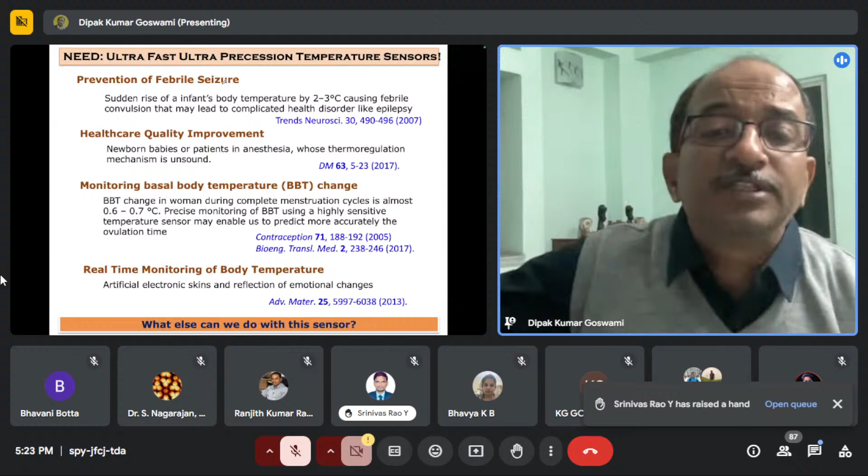So we can do a lot of things with this temperature sensor. One is continuous monitoring of body temperature for infants, which is normally done in the NICU, the neonatal intensive care unit. With these temperature sensors, we can do that. Health quality, BBT, basal body temperature change, real-time monitoring, everything can be monitored very easily.

So we developed a device to monitor the temperature of inhaled and exhaled air, because there is some difference in temperature, and humidity also. And then, just from how well you are breathing, we can talk about the situation in your pulmonary tract. Most of the time, people who develop COPD, their respiratory tract becomes inflamed, the passage narrows, and they cannot breathe properly. So there is obstruction in the breathing profile.

So we can very clearly see it, and the doctor does that, and that is why the spirometer is used, so they can see what level of obstruction you have. This is caused by a lot of effects, including pollution as well.

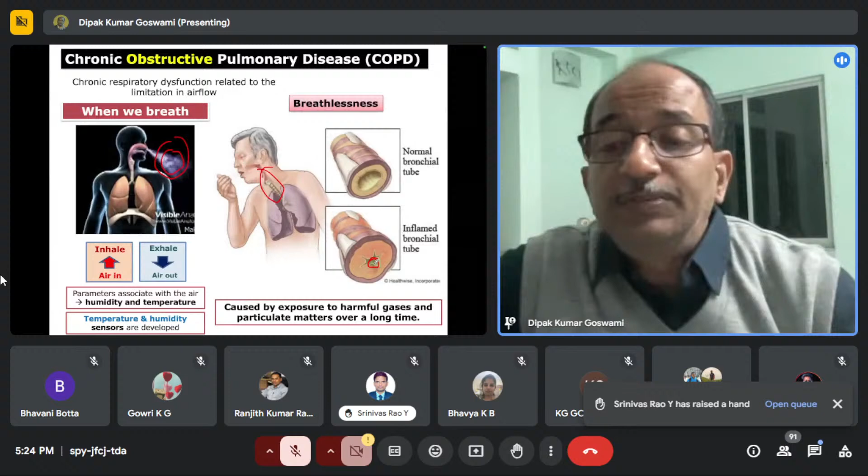Another related problem that can be tracked with this sensor is when you sleep, which is called sleep apnea. Most of the time, when you sleep, this muscle gets slack, and because of that it blocks the passage, and then we start snoring. And this is very common for many of us, mostly older people.

And what exactly happens is when you sleep, your pulmonary tract gets blocked, and for the whole night your body gets less oxygen, and this can lead to a very serious problem later, which is called sleep apnea. And you see that it can affect any age group.

There are other very critical problems for this also. You feel irritated, sleeping the whole day, and the most significant problem that we have in our country is, if you look at the data, that 80 to 90% of adults with sleep apnea remain undiagnosed, because what you need is to check your sleep.

So there is a sleep test lab, and these sleep test labs are very expensive, because we inquired at different labs, where the per night cost is like 20,000 to 30,000 to check your sleep. So you have to go to the lab and then sleep there and they test. So this is very expensive, and that's the reason that 80 to 90% of problems are not diagnosed.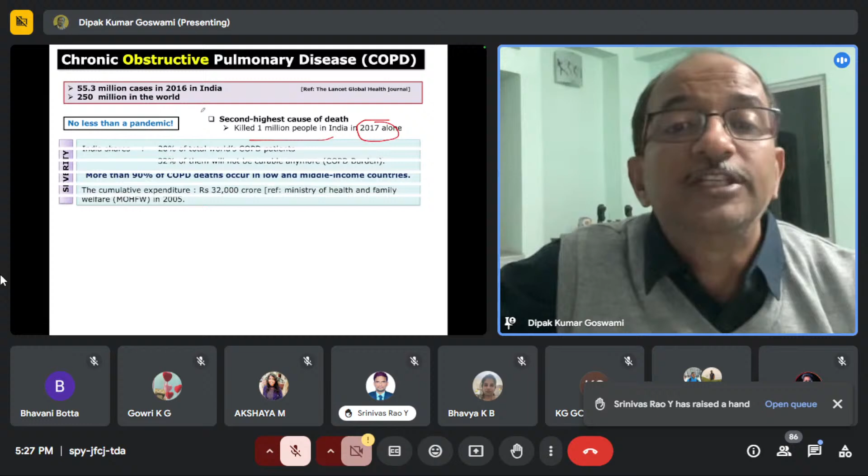If you look at this data, some of the data that I got, you see more than 90% of COPD deaths occur in low to middle income countries, right? Because they cannot test, and the process is also very expensive.

And as per 2005 data given by our Ministry of Health, the cumulative expenditure was 32,000 crore, and this 32,000 crore is the money transaction between patients and hospitals for COPD patients. So this is huge, like the annual budget for a whole ministry. Right? It's 32,000 crore. So you understand the severity of this disease.

If you look at other parameters in India, 30% of chest physicians, 70% of general physicians, 90% of general practitioners, and 80% of pediatricians do not use the gold standard for COPD, which is called the spirometer, to test. So based on some symptoms, they give medicine, and the patient is not able to recover, and finally they become COPD patients and cannot recover. So this becomes the COPD burden.

So this is a severe problem that one has to look at, and the assignment that we had taken is to develop something for the huge number of people who are suffering from that. In fact, this has taken a new dimension after COVID, because COVID actually affected the lungs, which we all know, and the numbers that I showed may be an order of magnitude higher now after COVID infection. We don't even realize it, but our lungs have already been affected.

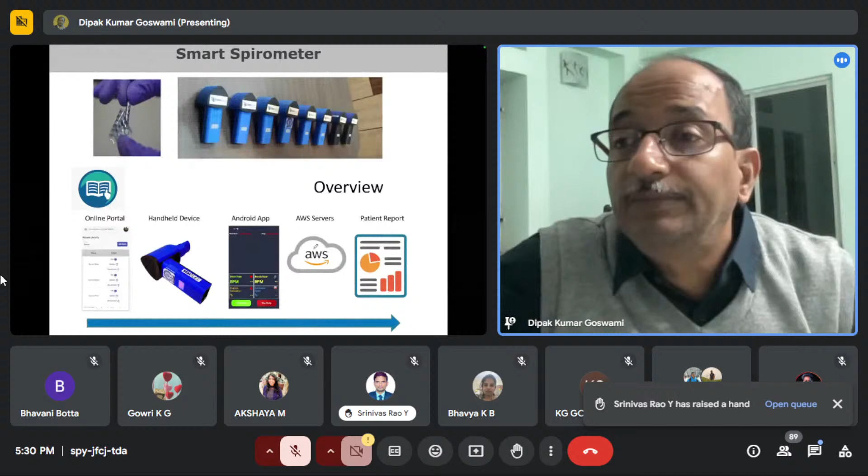So we developed this, and we now have an Android app, and this profile that you see is constantly monitoring your breathing profile, and the data is uploaded to an Amazon web server for cloud analysis and cloud computation, where we do AI and machine learning algorithms, and it can very well act like an IoT based device.

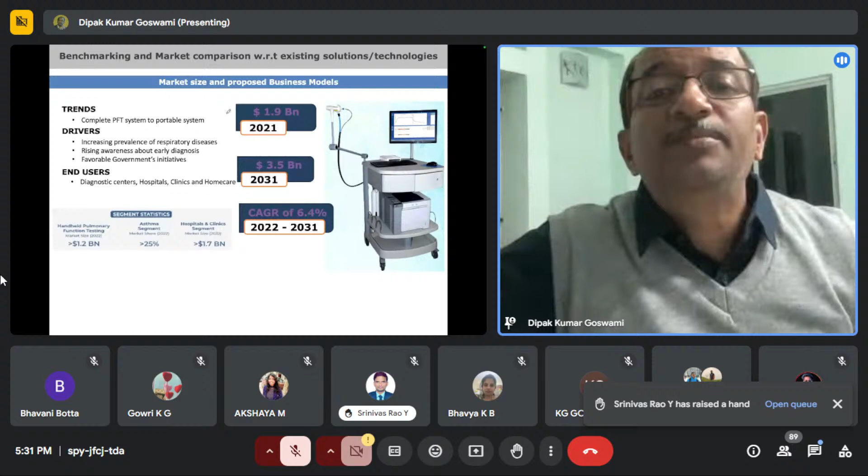Now, what is the market for this? So I'll just quickly go through, just to give you the background of what other kinds of work, being a scientist, you can do to push your fundamental research into a technology. You see the market survey, and this is the big gold standard spirometer, right? You have to go to a clinic, and you see the market, right?

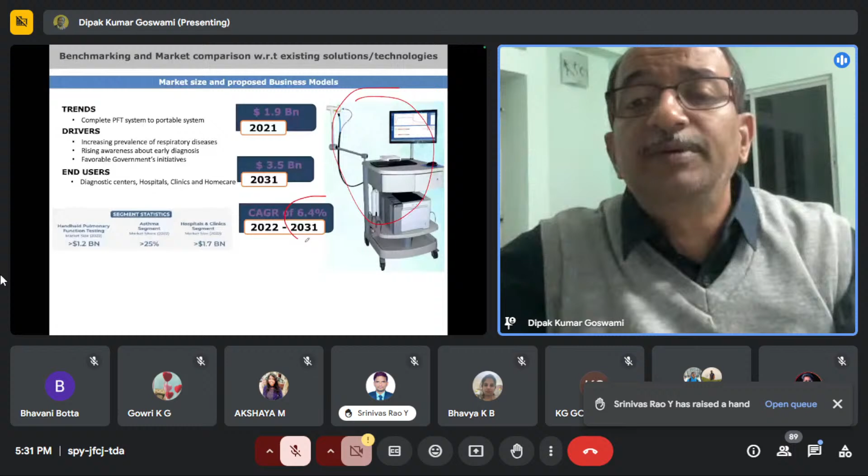There is a 6.4% CAGR annual increase in the requirement, and there are many companies who make this spirometer. Most of the time, in any hospital, you see this NDT system. The machine price is something like 1.14 lakh, sometimes 1.65 lakh. But not only is the price important, analyzing this data is also very important. You need a trained technician, otherwise this machine cannot be operated. That's the reason most hospitals do not have spirometers in their testing unit, because it's not only expensive, but also requires trained manpower who can handle this.

Now, if we can have a small device, then of course the patient can do it at home. Even a portable handheld machine can be given to the ASHA karmi and other caregivers in rural areas. They can visit home to home and collect data, and all the data will be collected to a cloud server, so even a doctor anywhere in the world can see the patient's different parameters. So that is what exactly we do.

We actually developed a portal for these spirometers. We have a user portal, employee portal, consumer portal, doctor-patient portal. All of this is done. We have an admin portal - all of this is done. You can actually visit senflex.in. This is the startup company we incubated to commercialize this product. We even have a consultant doctor portal, so everybody can log into their server and see the data, starting from admin to patient. So everybody has their portal ready. We did everything on our own.

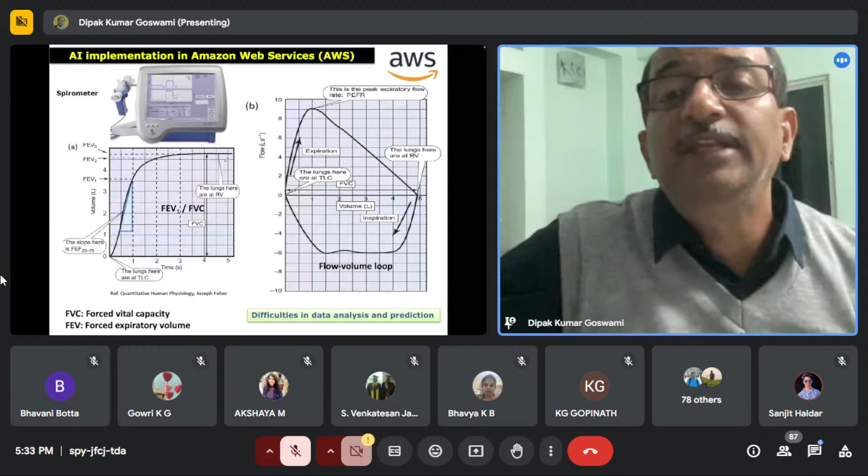So these are some of the things that can be done. You have this breathing profile - inhale, this is forced expiratory breathing, inhale and exhale, and finally you get this kind of loop. From this loop, looking at the shape of the loop, they can say this is the normal loop, this is mild obstruction, this is severe obstruction, and this is restriction. Just by looking at the shape of this breathing profile, one can tell the severity of the obstruction.

This analysis is not very easy because all these loops look almost similar. But if you use a machine learning algorithm, then the shape analysis is very easy, in the cloud server, the AWS server that we are using. So this is some of the data that I have - I'll just quickly go through it.

There is another important observation. Yes. Please also remind me when I have to stop, because I have to stop at 6 o'clock. So I still have half an hour time.

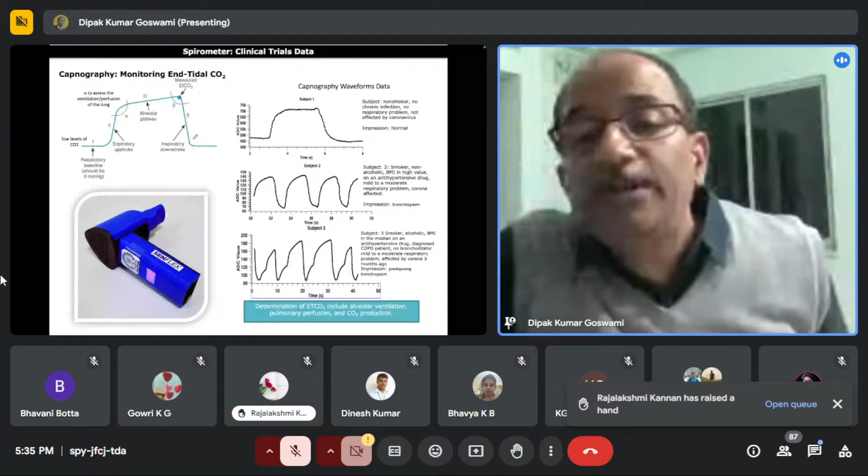There is another important point, which is called capnography. Even this device can give you capnography data, and capnography data is again about your breathing. This is the profile of your end-tidal CO2 - tidal CO2 is, when you exhale, what is the concentration of carbon dioxide. This is a different way of detecting, but these are the data that we have generated from this machine.

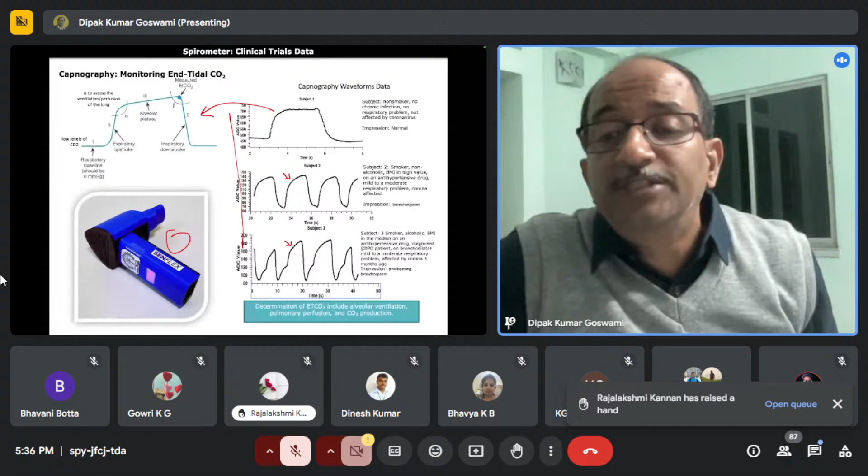This data has been taken from different patients. This is a normal patient - a non-smoker, no chronic infection, no respiratory problem. This is exactly similar to the standard profile. But if you look at these two patients, they actually had COVID infection, and you see the profile shape is completely different. Just by looking at this profile shape, the doctor actually predicted what kind of complexity they developed in their respiratory system. That's another advantage - we can very easily diagnose through machine learning and AI implementation in the cloud.

So I still have half an hour time, right? Can you confirm?

Yes, sir, you can go ahead. Yes sir, okay fine. So that's one example I gave you.

In fact, there are several such products that we are working on. I just gave one example of how you can push the fundamental science you do in the lab to develop a technology, validate it, and make a sellable product. It's a different ballgame, but if you think you can do it, then definitely one can do it. So one has to take the initiative and do that.

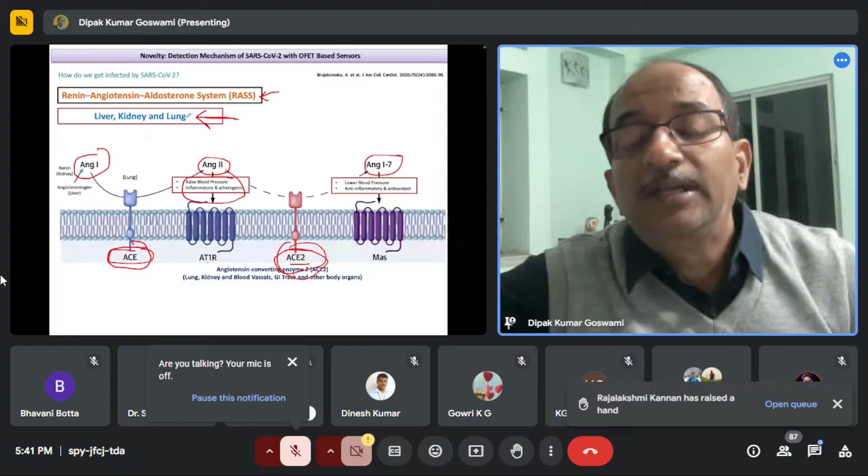So this ACE2 molecule is present everywhere in the body. Now, how do we get affected by this COVID virus? The spike protein actually binds with this ACE2 molecule, and the moment it binds, the virus penetrates into the cell. This is how we get infected - the S protein, which is the spike protein, binds with ACE2.

So what we did is utilize this ACE2 as a sensing material for this device, and then we actually - let me just keep this for some other time.

So this is the transistor. We used this ACE2 molecule as a receptor for the virus. We integrated this molecule into the transistor, and when you drop in the virus, it binds with ACE2, and the moment they bind, the current flow from source to drain is affected.

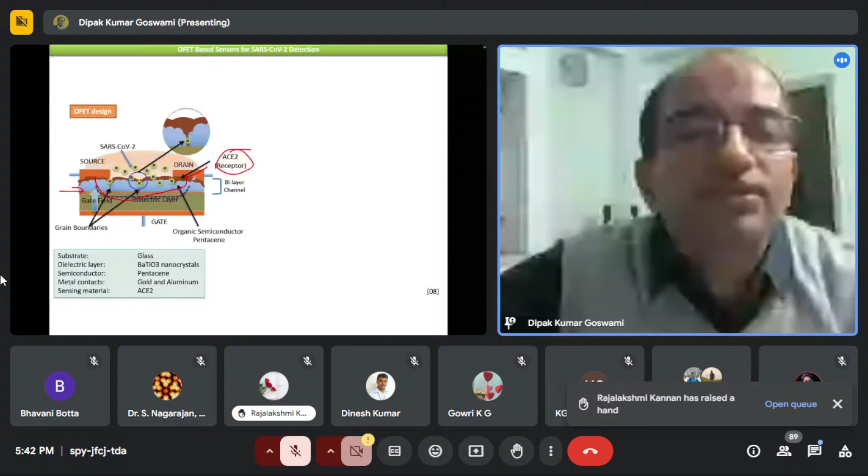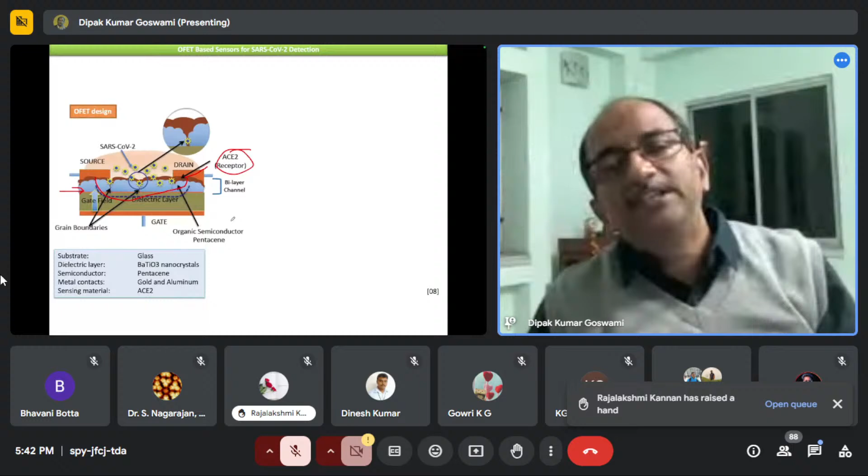If there is no virus, there is no binding, and the current changes in a different way. If there is a virus, they bind with the ACE2 molecule, and you get a different current flow. So from this change in current, we can tell whether your saliva has a virus or not. What we did is use the semiconductor layer in this transistor, which is pentacene.

You see this pentacene semiconductor layer, it's like a clear dendrite structure. What we did is exploit the grain boundary of this pentacene dendrite structure, and through this grain boundary we put the ACE2 molecule. When you put the ACE2 molecule here, you see these white patches.

They actually all penetrated into the grain boundary. When they go to the grain boundary, this molecule comes very close to the conduction channel, which is the semiconductor and dielectric interface. So this molecule gets access to the conducting channel very easily. Now when it binds with the virus, the electronic environment around that interface changes, which changes the current. That's a very simple way of measuring the virus.

So this is the organic field effect transistor. The operating voltage is less than 2 volts, such that we can use it as a wearable device, a portable device, and then look at the data. So this is our transistor.

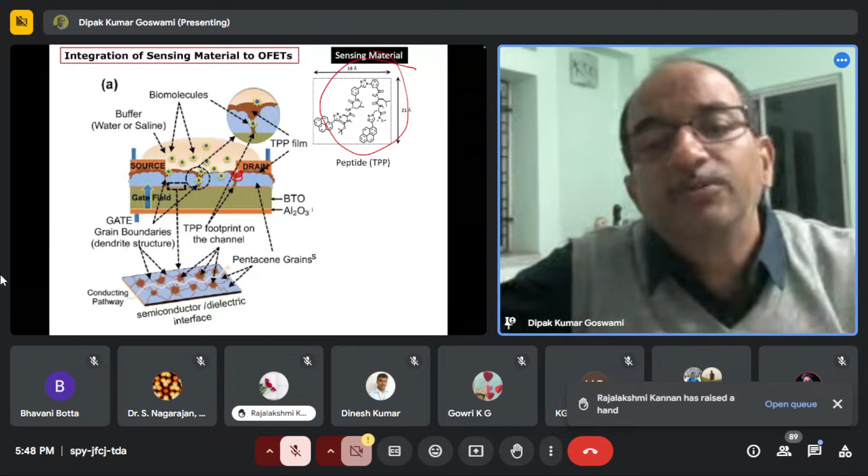So this is a point of care detection with similar HSA protein, so human albumin detection. So again the same principle, but in this case, instead of ACE2 molecule, we got a peptide. So the peptide actually binds with albumin, and this was our sensing process. So we put the peptide here through the grain boundary, and then we developed the sensor which actually measures very well. Since there's not much time available, I'll show you finally the data here.

And what is the advantage? You see that it doesn't need to extract out the same amount of blood. You directly drop 10 microliter blood from your finger to the sensor, and it takes something like 100 seconds, like 1.5 minutes, and you'll be able to say what the concentration of albumin in your blood is. So that's absolutely a device which acts like a point of care device, and it's minimally invasive, right?

It doesn't need to go to the pathology for that, and where mass screening is necessary, this kind of technology will be very useful because it can immediately give the albumin level without any further chemical process of the blood.